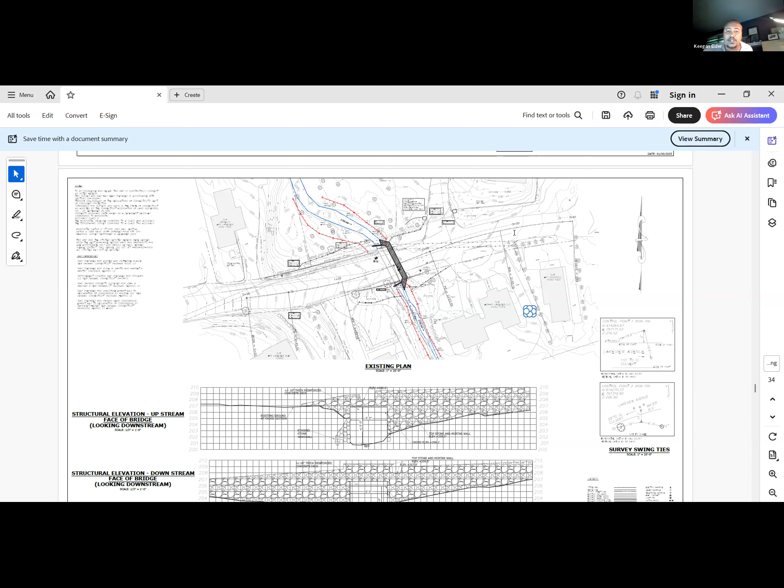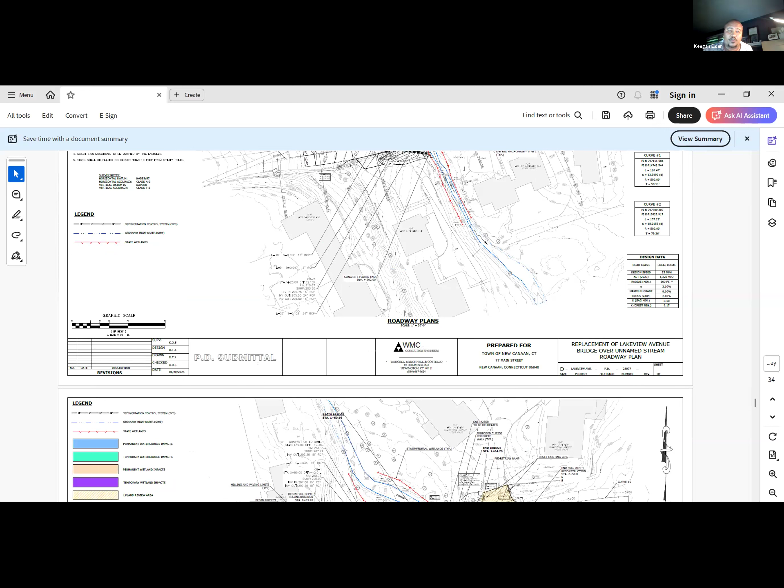In order to do that, I'll scroll down on my plans here and give you guys a view of that work. So this is our existing or proposed plan. The roadway work needed is shown in yellow. We're doing some minor drainage work just west of the culvert.

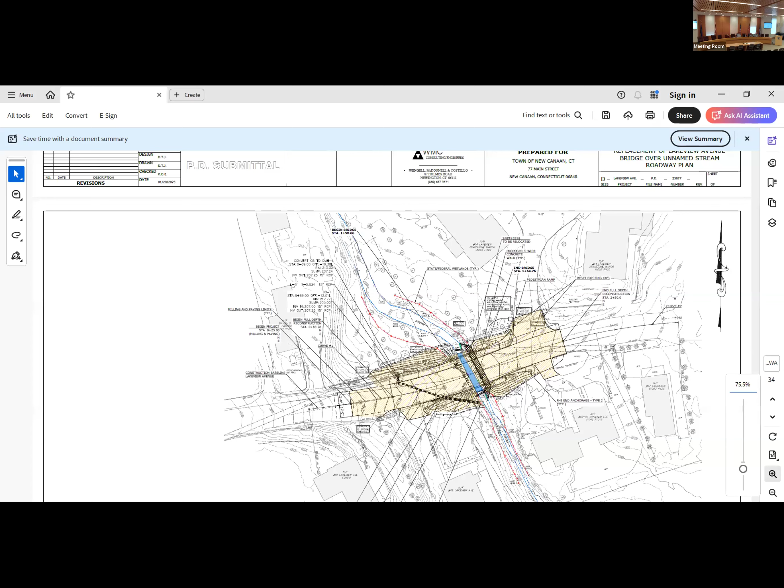Before - sorry Mr. Elder, could you move your screen, zoom in so we can read the notes? Sorry, yep, that's better. Okay, here we go, up a little, and can you move it to the left? That's perfect, thank you. Yep, sorry about that. No worries.

This is Lakeview Avenue, running west to east, and this is the brook running north to south. Our existing culvert is that light blue shaded area. Our proposed culvert is slightly wider than the existing culvert, and like I said, it's going to improve hydraulics and conveyance of water through this area.

In order to construct this culvert in the dry, which is a requirement by fisheries and the E&S guidelines, state of Connecticut, we're going to temporarily bypass the brook with the dark shaded bypass pipe as shown here. The contractor will set up his E&S controls at the beginning of construction, install temporary cofferdams shown in the light blue or aqua color, bypass the brook, during which time he'll remove and install the new culvert, construct any adjacent wing walls needed, backfill, install guide rail, drainage, and repave the road. It's a relatively straightforward project.

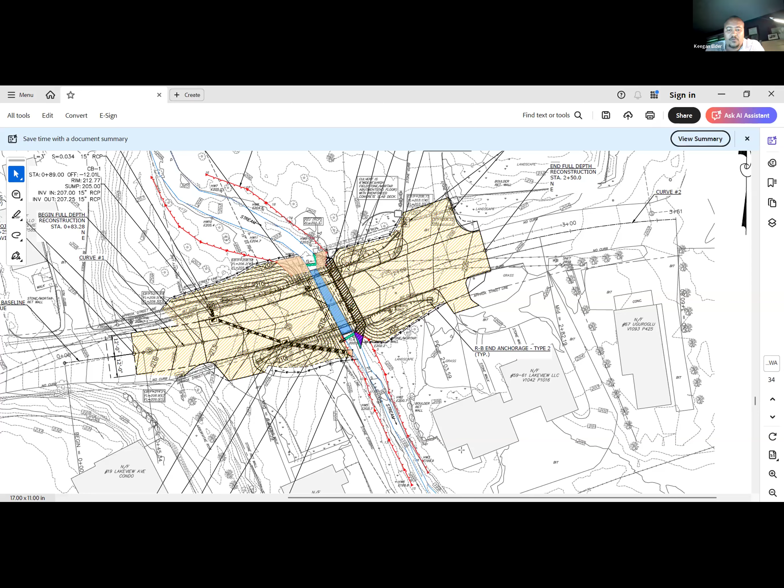The cofferdam that they use or can use would consist of either sandbags, dead men wrapped in plastic, or concrete blocks. We don't anticipate that there'll be driving sheets for this work - it's not that deep of an excavation that driving sheets would be required, but essentially that's the gist of what we're going to do here.

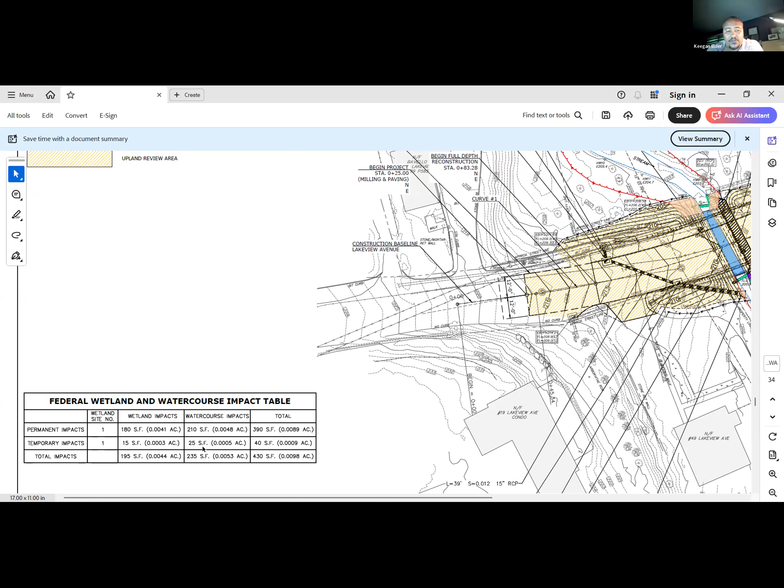For impacts, our wetland impacts associated with this work: permanent 180 square feet, watercourse 210, for a total of 390. Temporary impacts, that's the area of the cofferdams, is 15 for wetland impacts, 25 for watercourse impacts, with a total of 40 square feet. So total wetland impacts 195, watercourse impacts 235, for a total of 430 square feet of impacts.

And all of that work is associated with either removing the existing culvert and installing the new culvert, any grading associated with that, our temporary bypass pipe, and reconstruction of the existing drainage that flows through the project. I'll go through another plan or two just to give you guys a concept of the proposed structure.

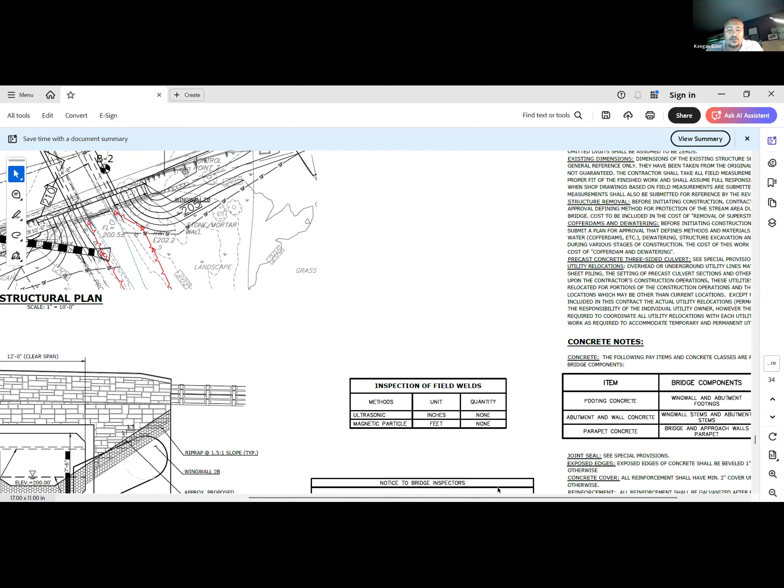So this plan, an enhanced version of what I previously had up on the screen, better depicts the limits of our work—the wing walls I mentioned earlier, and guide rail along the edge of the road to protect oncoming traffic from the drop-offs down the channel.

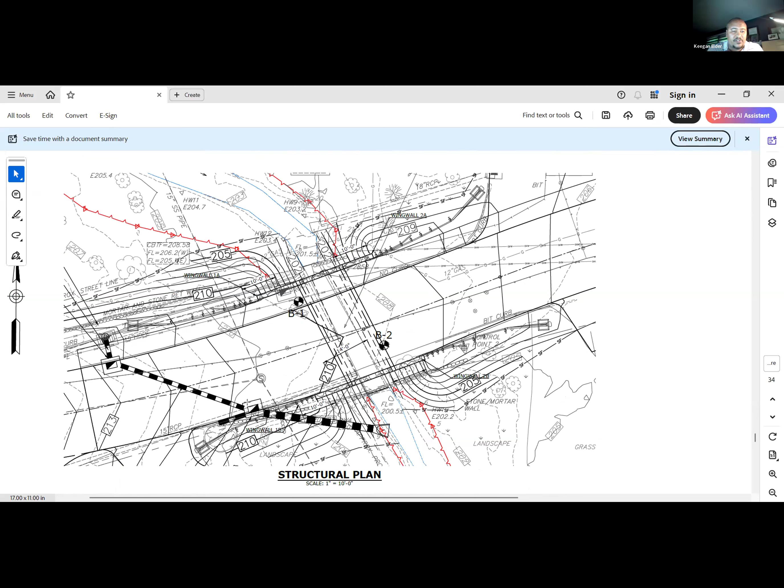We have a sidewalk over the culvert. Here's our culvert overspanning the existing one. The proposed drainage improvements are shown with catch basins, pipe, and outlet pipes. This view captures what it would look like from an elevation perspective—our culvert shown here, this is our box culvert or channel work, with wing walls and parapets shown with the block shading.

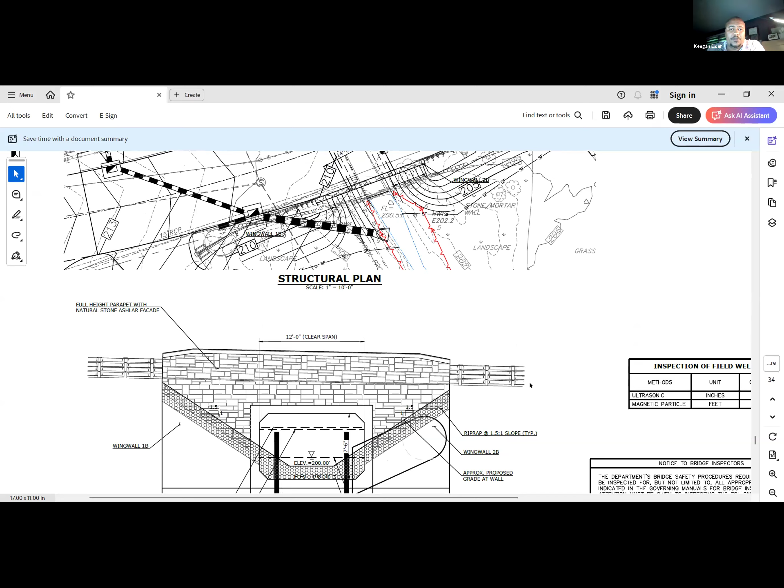As part of this work, we will also be replacing any existing stream bed material found on site within the new culvert. That's one of the recommendations made by fisheries—that we reuse any natural stream bed material. If we need supplemental material, they gave us guidance on specifications for sourcing it to mimic what's existing in the area.

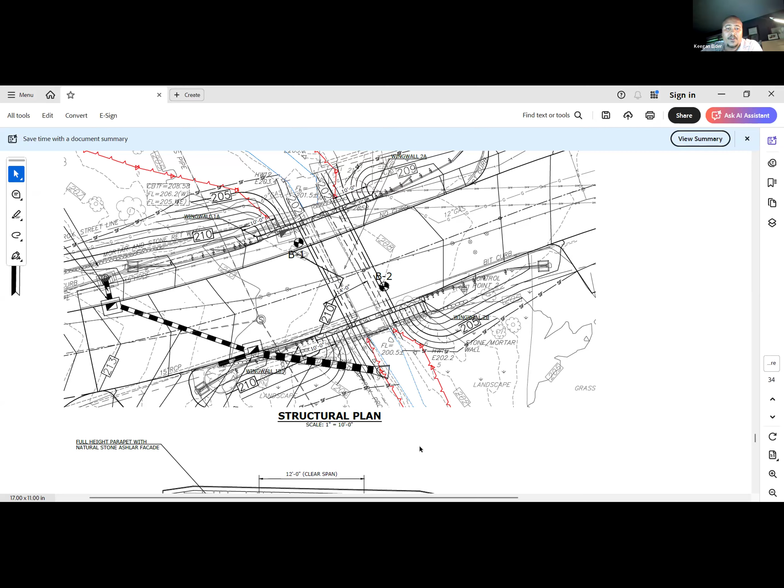This project, from a schedule perspective, is hopefully going to move forward at some point this year. Our next step, once we get through this local inland wetland requirement, is to consult with the U.S. Army Corps of Engineers. There's a potential funding grant from the state of Connecticut called the Local Bridge Program, where one requirement is that we present this project to DEEP and the Army Corps for their review and concurrence. A determination on that grant should be coming sometime in July.

Once we get that determination, if successful, we can go ahead and submit to the Army Corps for their review and approval, in addition to DEEP for the 401 water quality certification. That process generally takes maybe 2 to 3 months. So with that in mind, I think the project will be able to go forward as soon as this fall—but again, that'll be up to the town and their construction schedule.

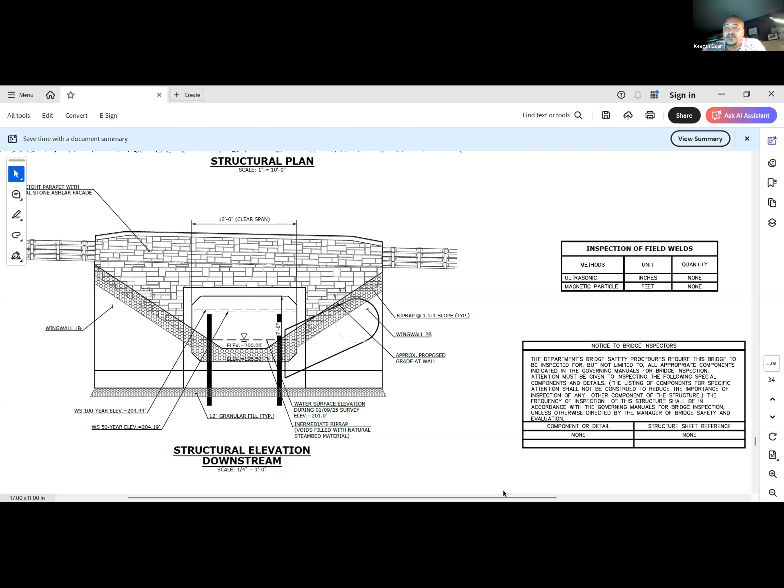With that, I will open it to any questions. Thank you very much, Mr. Elder. Do we have questions?

Director Holland: Keegan, thank you for the explanation on the setup and staging for construction activities. Can you review a bit more about post-construction of the culvert and wing walls, and how the embankments will be stabilized upon completion of the activities?

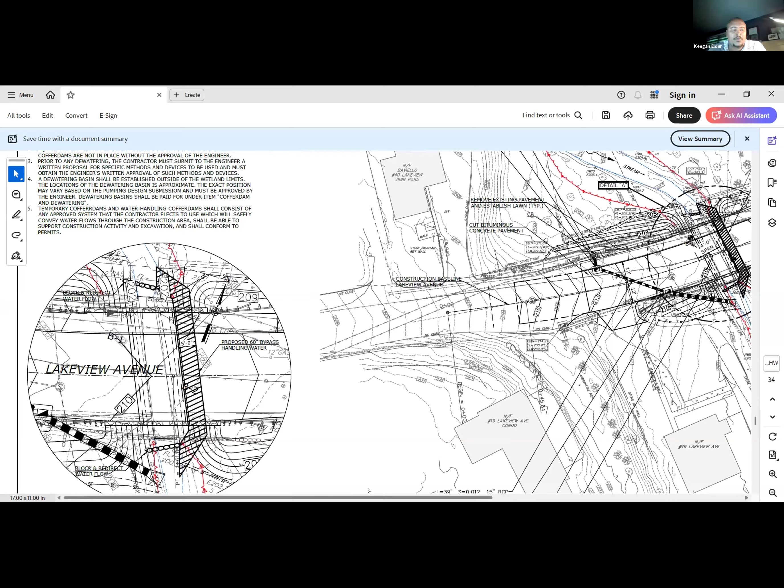Sure, absolutely. So our existing embankments, I'll highlight on this view, will be stabilized with a natural 2-to-1 slope. This slope will be seeded post-construction. The limits of our clearing—there aren't too many trees out there. There may be a couple removed for construction, a couple that are dead or close to dying. As for the slopes and embankments, we anticipate gentle slopes off the edge of the road at 12-to-1 for about 4 feet, matching what's existing, then 2-to-1 down to the channel and to the toe of the slope.

In some cases, for example on the southeast corner, we have closer to a 3-to-1 or 4-to-1 slope, and on the other three corners, closer to a 2-to-1 slope that is stabilized with grass and natural plantings.

There are no proposed locations of riprap. The flows through here, although relatively steep, scour numbers did not indicate significant scour, nor is there evidence of significant scour in the existing conditions. If it was determined that we needed stone or riprap to stabilize these slopes, fisheries acknowledged that we would need to surface dress the riprap with natural stream bottom material. But as of now, we're not proposing any additional stabilization beyond natural grading down from the wing walls and turf establishment.

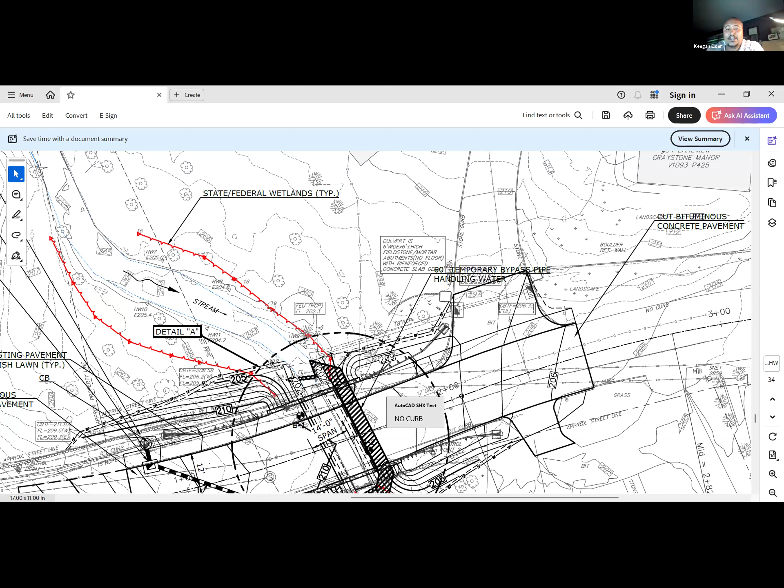Yes, it's going to be closed. Where is the detour going to be then? There will be a detour in place. We have a plan proposed to the city.

I don't have that plan with me currently, but I can certainly share that with the commission. The project is anticipated to be closed just before and after the bridge. Our specifications require that the contractor maintain access to any driveways, mailboxes, trash pickup, and emergency services. All of these things are standard that they are required to do during construction.

How long is the bridge going to be closed? We anticipate this to be a one-season project, which is generally in the 8-month range. I don't see much complications that would make this longer. Matter of fact, if you get a good contractor, they can get this done as soon as 6 months. But from a planning perspective, we anticipate it to be an 8-month project.

That includes procurement of materials, submittals that are needed, removal of the existing, installation of the new, any in-water work, stabilization of the slopes, guide rail, new sidewalk, new pavement, driveway aprons, drainage, and completely repaving the road. So probably about 8 to 9 months from a planning perspective.

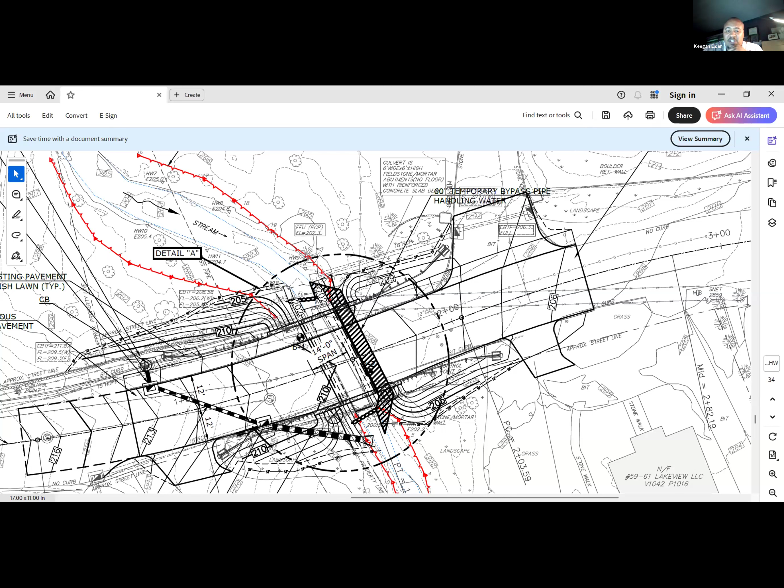And as a general rule of practice, a year beyond that, the contractor is still required to make sure these slopes have reestablished growth and are stabilized before that retainage is paid to the contractor. So there are a few mechanisms built in to make certain that they get back on site and make sure everything has been stabilized and established. During construction, if he has to go away or shut the site down for any duration, he will be required to protect those slopes as well, in his own best interest. But that's generally what's in place for establishing and protecting the slopes.

Great, thank you very much. Just for the commission members' knowledge, Joe Zagorensky is also on the call by Zoom, and he's our town representative and does all the bridge construction work. I'm pretty sure Joe is much more familiar with what Keegan's talking about, so it does not seem necessary to add another special condition. So the only special condition I would recommend is the as-built drawing upon completion. I believe Commissioner Owsley has an additional question.

Nope. Oh, okay, very good. Sorry, we thought you did. So does it sound as though we need that potential second condition? I would say no. Joe can chime in if he wants to unmute himself and add any color to the discussion we're having. Yeah, we're not going to walk away from the project until it's stabilized, so I don't think there's any reason for any sort of special condition. It is the town.

Okay, so just one more. Yeah, please, go ahead. Mr. Stepanek. Joe, who has to approve this besides wetlands? Is there another commission?

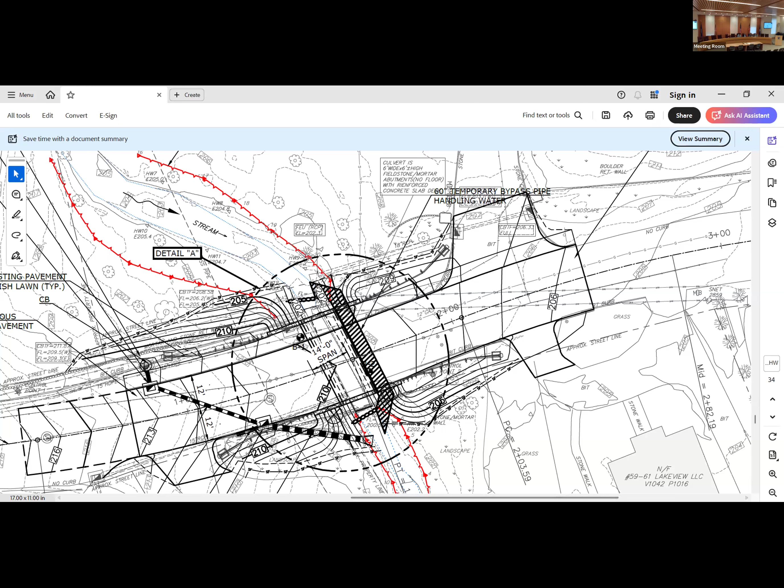Application IW-25-19, 22 Parish Lane, Daniel and Gillian Gabrielson. Remove invasive plant material and install native plants within the rear woodlands. Install low impact pressure treated wood boardwalks over wetlands totaling approximately 100 linear feet by 4 feet wide. Using stone dust or native gravel, install on grade walking paths in upland areas totaling approximately 300 linear feet by approximately 4 feet wide. I'd like to invite the agent to make a presentation to the commission, I believe it's Mr. Troy.

Yes, good evening all. Can everybody hear me? We can, thank you. Let me share my screen. Okay, so I'm here to represent the Gabrielsons for their property, for the wetland renovation in the back of their property.

The Gabrielsons basically have 3 goals in mind for this project. The first goal would be to eliminate the invasives that are taking over the area. There's Japanese barberry, goutweed, porcelain berry, and burning bush in the area that is basically choking out all the native species. The property sits elevated on a retaining wall, so their entire view from their back patio and house is of this wetlands. With the invasives choking it out, it becomes an eyesore to the owners, and it's also becoming environmentally impacted by the invasives taking over.

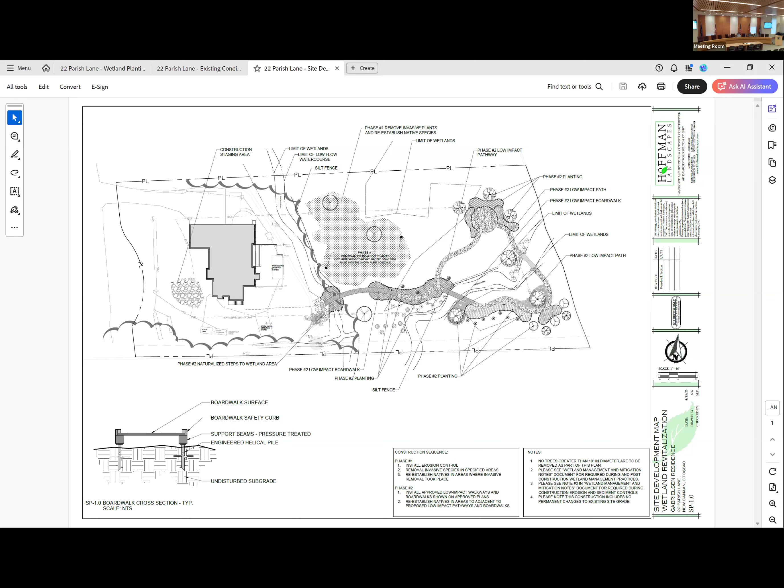The areas right along here are the elevated boardwalks. They would be mounted on helical piles into the ground with a wooden post on top. Excuse me, I'm sorry to interrupt, do you think you could zoom in a little so that we can see the detail more clearly? Thank you so much. Is that good for commission members? That's better, yep, thank you so much.

So I'll start back here. This is an existing staircase that comes down with a walkway that goes across what I would call a seasonal brook. The only time I've ever seen water in it is now with all this rain. We would then access the first section of elevated boardwalk that crosses the direct wetland area, dropping onto the gravel path, and then picking up the elevated boardwalk again to cross this water course, which has always been flowing anytime I've been there, so it's a fairly active water course.

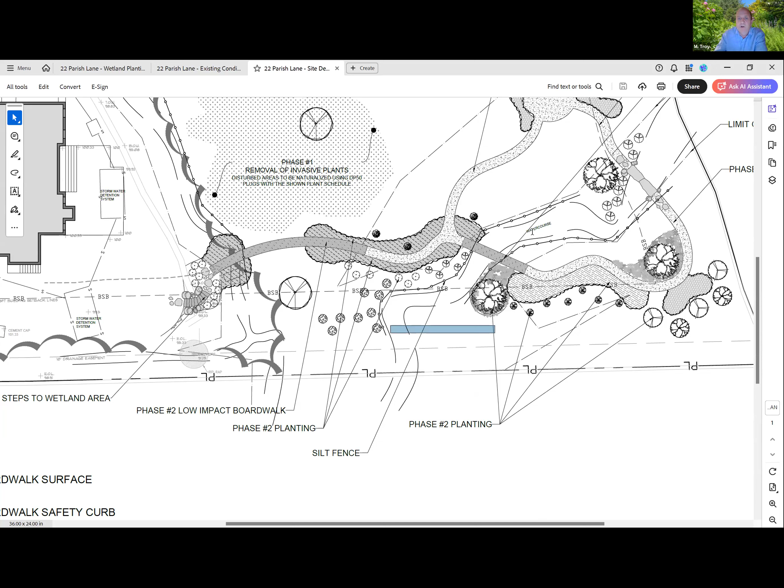The one thing I'd say, when I was out there the other day, I would like to push the crossing a little farther up because the banks of the stream get much steeper and higher here, so I don't think we'd have issues with debris coming down the water course and contacting the bridge. Could you point with your cursor where you'd like to put that? It's in this narrowed area, it becomes very steep. This entire water course is fairly well lined with natural stone. The only place it isn't is up in this area where it does overflow the banks and floods into this area, but otherwise it's pretty well secured on the banks.

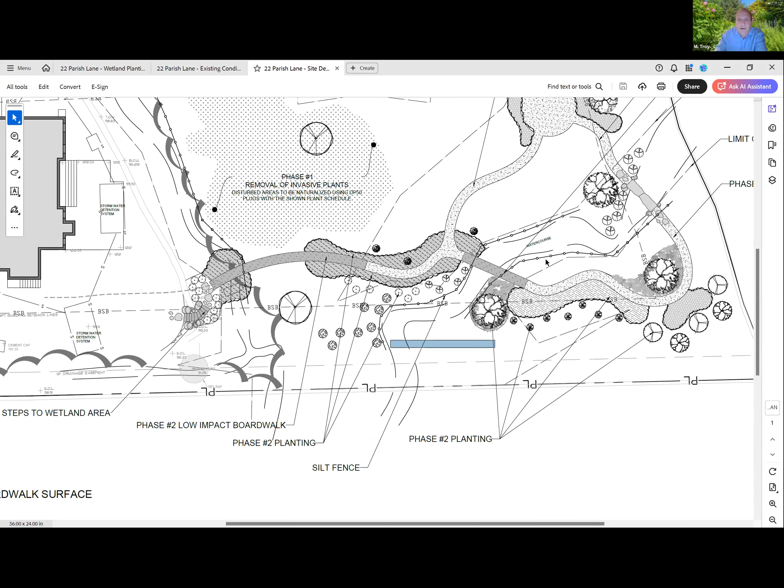So after crossing this bridge, they just want to be able to access their land over here. We would come around, with a lot of native plantings in this area, coming to this area where there's already a double stone on an old farmer's wall where you would cross the waterway again. This would not be constructed here, it already exists.

Coming up in this area, back into the gravel. The draftsman drew this as a circle, but I don't envision it as a circle. I envision it just as a level area that may even just go back to leaf litter. I don't see a reason this necessarily needs to be gravel, but it's the flattest area on the property, and it's an area they want to surround with lush, nice plantings.

We'll introduce things like pawpaws up here, and maybe have a pair of Adirondack chairs or something to read a book up in here. And then it basically returns you back in and you exit the wetlands again.

In this area over here is really the only tree that they're interested in taking down. It's a large dead tree, I believe it was an old swamp maple, or Acer rubrum, and it's leaning towards the residence. It's a fairly good sized tree, and it's been dead for quite a while.

This is a heavily infested area of Japanese barberry, and that's where we would put a lot of the plug introductions in that area.

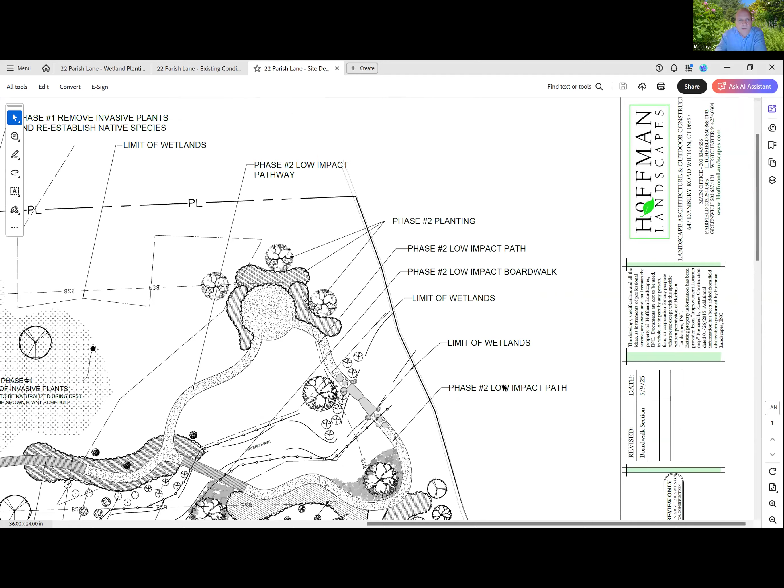If I can switch, I'll bring up the planting plan. So this is basically showing you what we want to introduce into the area as far as plantings.

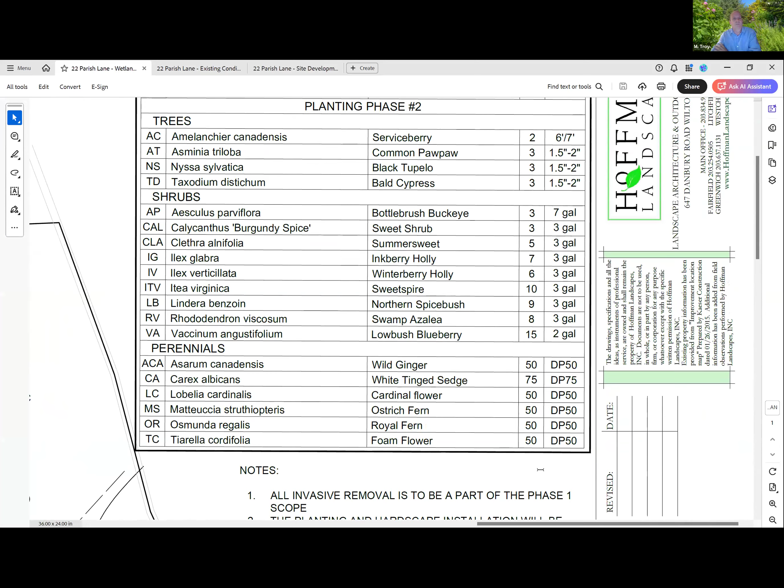For the grasses, we want to use carex. We're going to put some marsh marigold, cardinal flower, golden Alexander. That's all going to be introduced primarily as plugs, DP50 plugs and DP75 plugs.

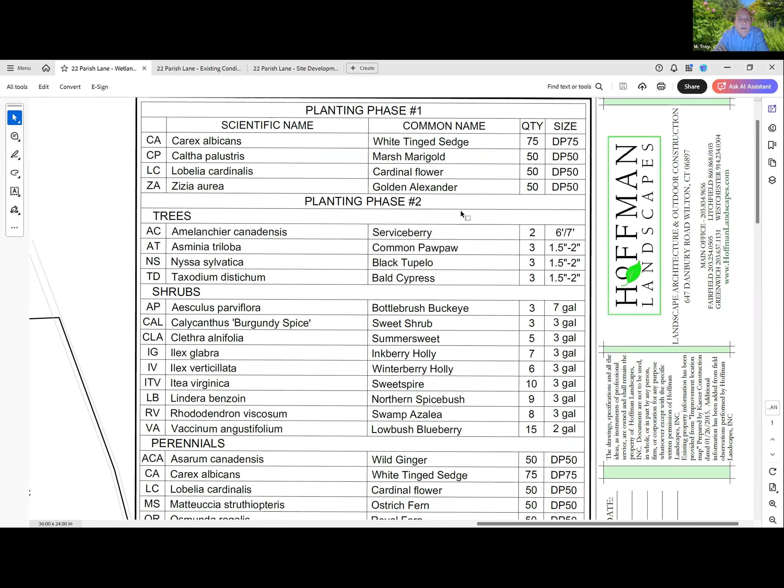And then coming down below that is sort of the larger shrubs or small trees, Amelanchier canadensis, and the common pawpaw. Nyssa sylvatica would be introduced in the area where we would be taking that one large tree down. So essentially over in this area here, we put the Nyssa sylvatica in.

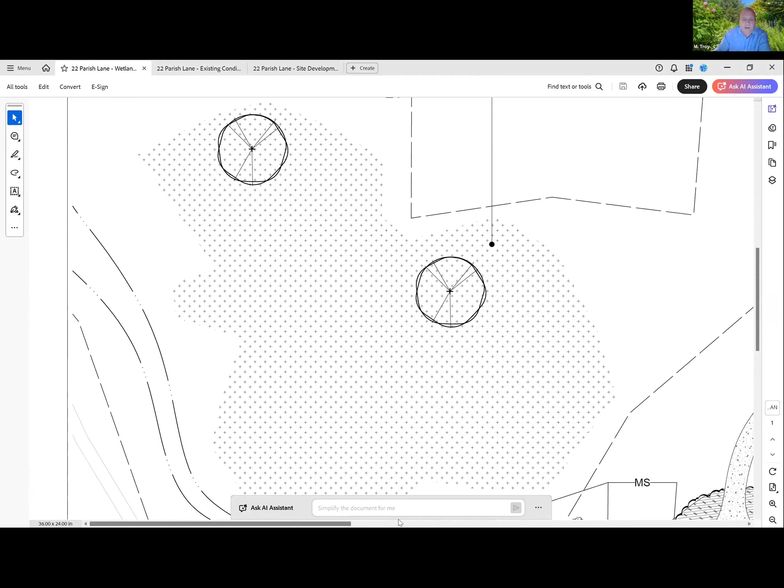Taxodium distichum in the lower corner. Let's zoom this out a little bit so I don't have to zoom so much. So we would be putting the Taxodium distichums over in this area here after.

And also this whole entire area, you can't even walk through there with all the burning bush. So by opening that up, we're going to create better conditions to grow the native plant material.

As far as shrubs, we're going to put Aesculus parviflora, or Calycanthus 'Burgundy Spice', Clethra alnifolia, Ilex glabra, Ilex verticillata, Itea, Lindera, Rhododendron viscosum, and Vaccinium angustifolium.

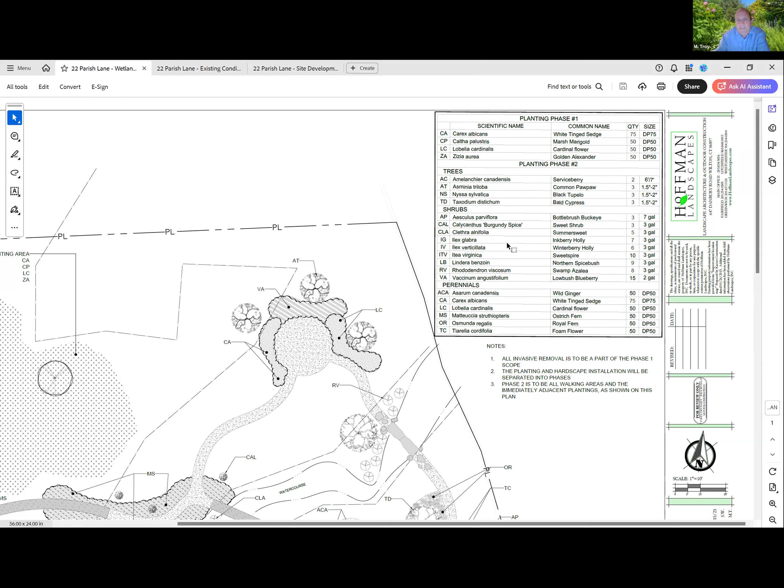And the perennials, as you can see, we're doing Asarum canadensis, Carex albicans, Lobelia cardinalis, Matteuccia struthiopteris, let's just call it ostrich fern, royal fern, and foam flower. And that's primarily what we're proposing to do.

Any questions? Any questions from the commission?

This is Angela Jameson. I just have a couple of questions. I mean, it is a lovely wetlands. You stand there just below the house and you look onto those wetlands. To me, they look absolutely lovely as they are, except of course for the invasives.

But from what you've said, the homeowners really want to have some paths through those wetlands so that they can enjoy their property. Could you just show with your cursor where there are existing paths in the wetlands right now?

So essentially this entire area over in here, well, I guess starting here, it's pretty much open. There's not a lot of growth there. There are some natives, and some Japanese primrose that has come downstream and is growing in this area. So there's not a lot of growth here.

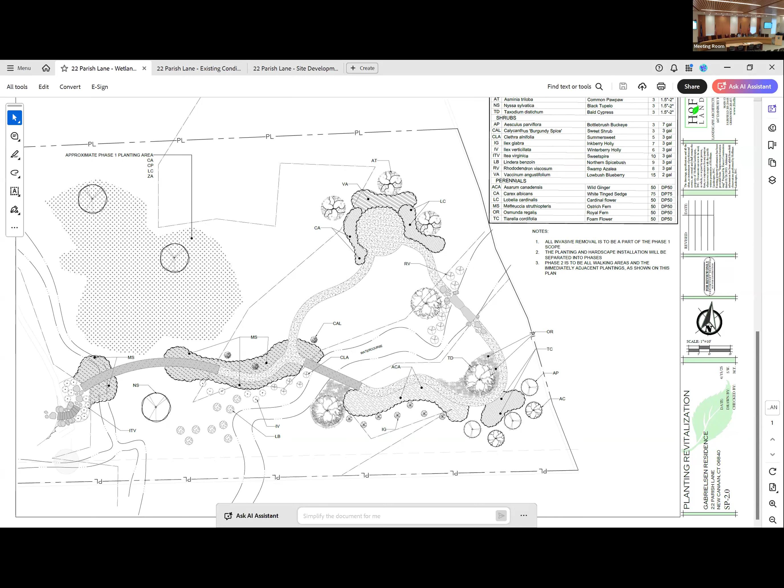I had a question regarding your maps. I'm looking at the site development map dated April 25th, and there are quite a few lines on there, so I did some coloring to identify where the wetlands are. I believe the wetlands on this map are shown with one dot and a long dash. By the house there's a comment that says limit of wetlands, but I think that pointer may not be in the correct place. I believe the line with 3 dots is the actual low flow of the watercourse, and the limit of the wetland should extend out to the line with a single dot. But maybe I'm confusing something here.

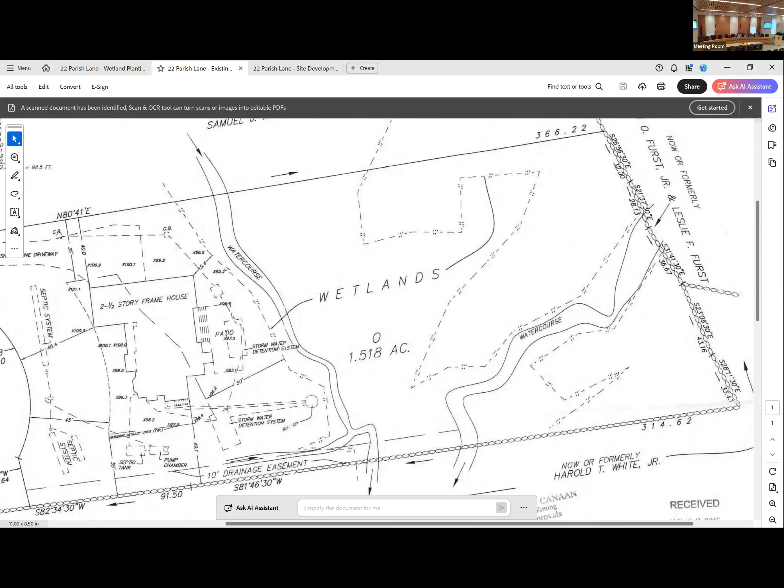The plan we worked off, I'm not seeing that on it. If I go back to our plan, his site plan. Right, I'm looking at your site plan. I'm basically questioning whether you have accurately shown us the limit of the wetlands.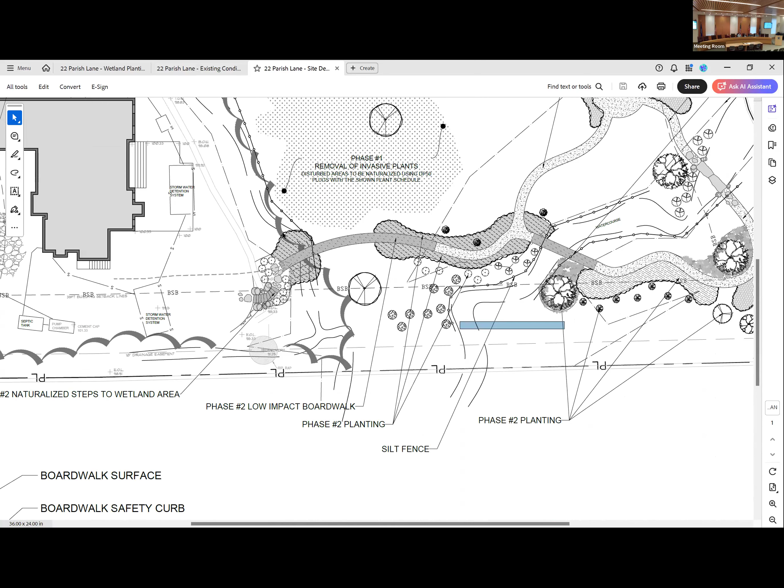Trying to see where they have these arrows. You had it a minute ago, if you just go down a little bit. No, the other way, that's it. So move it down a bit, north side of the house. Go up. There you go, okay, see, between the two property lines. Yeah, they do have that in the wrong area. I'm sorry, yeah, right, that should be over here. There you go, right, yeah, there. I think that pointer is not correctly extended. That was my point. Yes, I agree with you.

Maybe you could just resubmit one copy which has that pointer extended. I'll take care of that in the morning. In addition to making that correction on the map, good catch, Madam Chair.

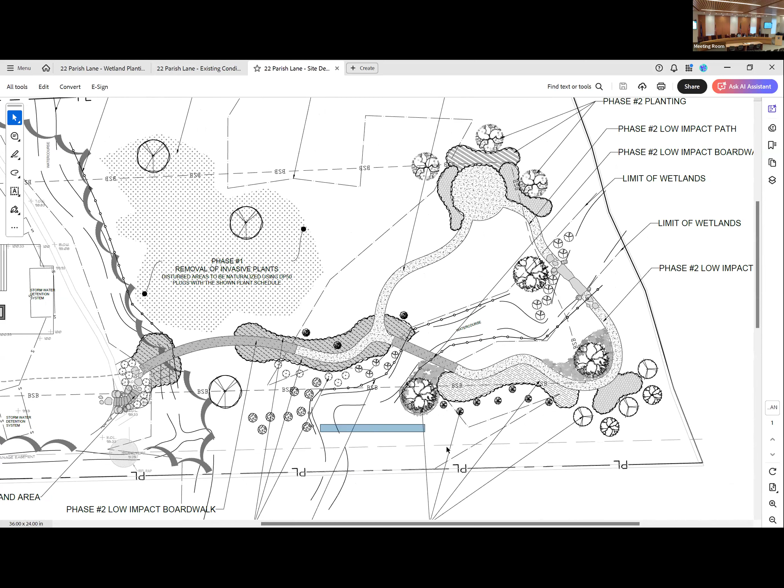You mentioned that you would like to potentially shift the location of one section of boardwalk. Yes. If that could be reflected on the submittal as well, once you determine where that will be shifted to, I think that would be helpful. I will do that. And I had another question.

Are all the felled trees going to be replaced numerically? So the only tree we're really proposing taking down is the one large dead Acer rubrum. We're adding 2 taxodiums and 3 Nyssa sylvaticas, I believe, so we're adding 5 trees back into the planting. Well, that's good, that's great.

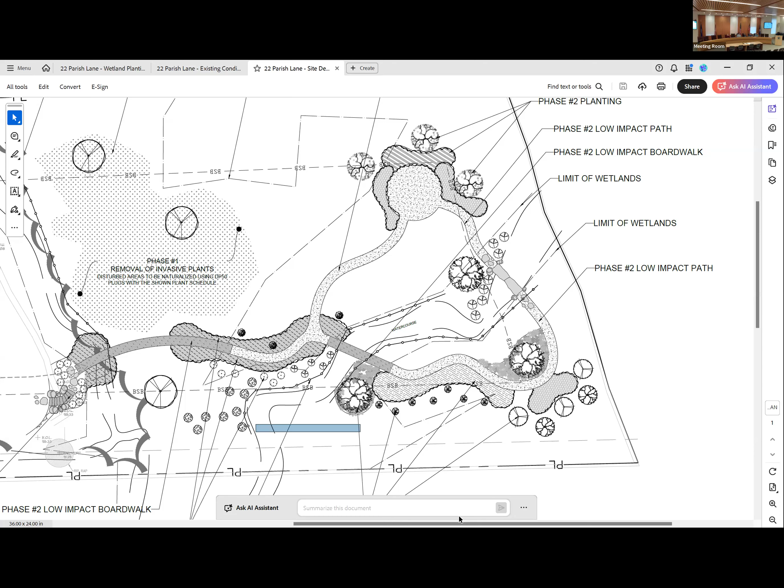Okay, Director Holland, any special conditions that you can think of? A few more questions. Sorry, I'm full of questions tonight. You had, on your plan, I see you phasing different aspects of the plan. It looks to me like phase 1 is the primary motivation for the project, to remove the invasives. Correct. And then would replanting take place as part of that phase 1 project, or any kind of mitigation to that area?

So first off, the phasings were for a couple reasons. One, we originally hoped to get the invasives out prior to them leafing out and growing. Obviously that hasn't happened. Phase 2 was so we're not working in wet conditions; our intention was to do it in the fall season so we're not working in the mud. I would probably imagine this may end up becoming a 1-phase program. I can't speak for the Gabrielsons, but since we're looking later in the season, this may end up being a summer project where we tackle both phases. Did that answer your question?

Yes, I guess my concern would be if phase 1 occurred and then ultimately phase 2 never occurred for some reason. I would like to be assured, and I think the commission would like to be assured, that it is a full project, especially any mitigation planting that would be taking place. Yeah, so all the mitigation planting we can do in phase 1, we will do in phase 1. Obviously our access to the lower right-hand corner of the area is limited without that boardwalk, so I'm not sure if we would have ways to carry trees across that watercourse. That would be reliant on phase 2 going in. But because we're going to be removing all the burning bush, we would do the herbaceous and smaller shrubs in that area as part of phase 1. Their goal is, like I said, to get rid of the invasives which are taking over, and have this attractive as they sit on their terrace to look down on it.

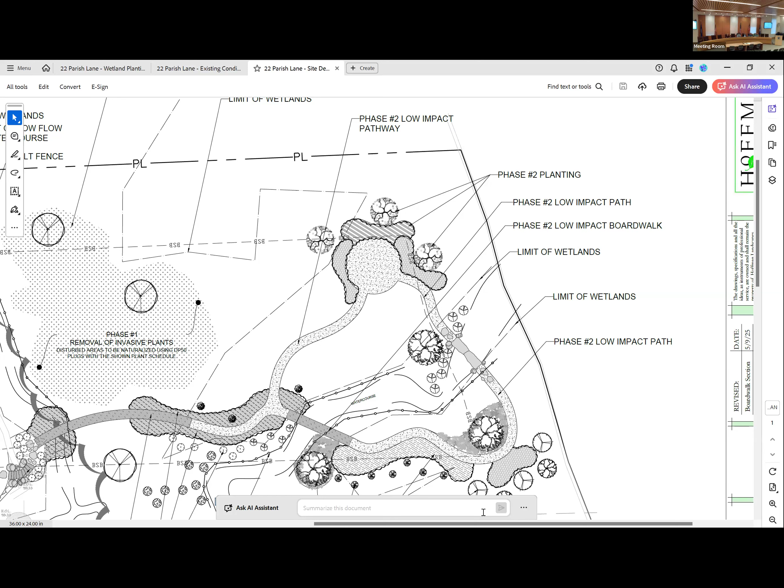Somebody like to second that? I second. Mr. Ramirez, thank you. All those in favor, please say aye and raise your hand. Aye. Commissioner Owsley, thank you so much. So that is approved unanimously. Thank you very much indeed. Mr. Troy, appreciate your time. Thank you. Have a good night.

So moving on, item 10, application IW-25-37, IW-25-24, 37 Long Lots Road, Min Kong Tang and Yuan Lin.

I am not going to read the description of what they're planning to do, because I believe that there has been a change here, and I'm going to ask the agent, Barbara Wilson, to explain that change and to make her presentation to us.

Yes, good evening. I'm Barbara Wilson. I'm a licensed landscape architect from New Canaan. I was hired by the clients because they wanted to do a couple things. They wanted to create a flat back lawn, and then they wanted to do some removal of dead trees in their backyard. What has come to pass, the owner has opted now to not do the grading of the back lawn area, and therefore we don't have to do any grading, filling, or renovations in the mostly upland review area at the rear of the house.

So what happened is the owners wanted to originally remove some dead trees. There was a lot of very large standing dead trees, and they were very hazardous in their backyard, and they were worried that in the woods upland review area and the wetlands, their children going back there might get hurt. So they hired an arborist who was supposed to come out and remove some dead trees. And the arborist proceeded to basically clear cut, which is shown on these photographs. Can you see my photographs? Yes, we can.

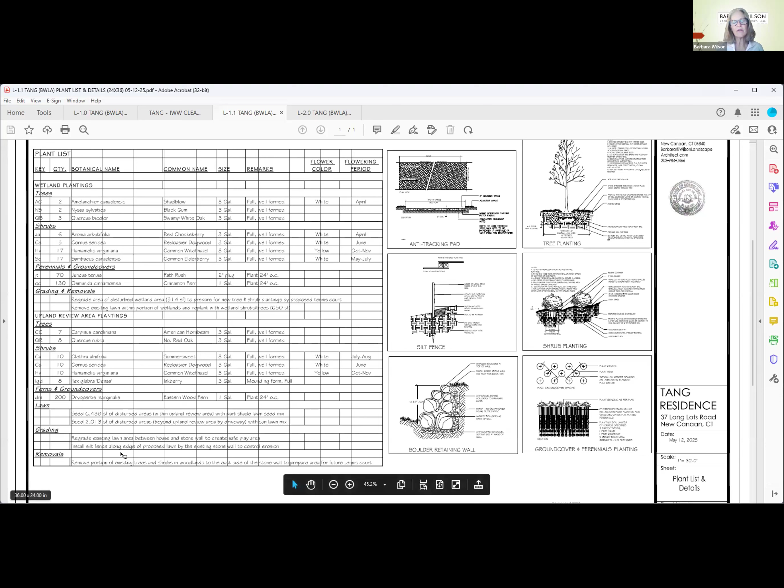So that is it for my presentation. Some of these details, we're not doing the stone wall, we're not going to do the silt fence because there's no need, and we're not going to do the anti-tracking pad, but we are going to do all of these plants here. And then that was the sort of removals and demolition, which isn't going to necessarily happen. This whole area is not going to be disturbed at all, and the stone wall is all going to remain as is.

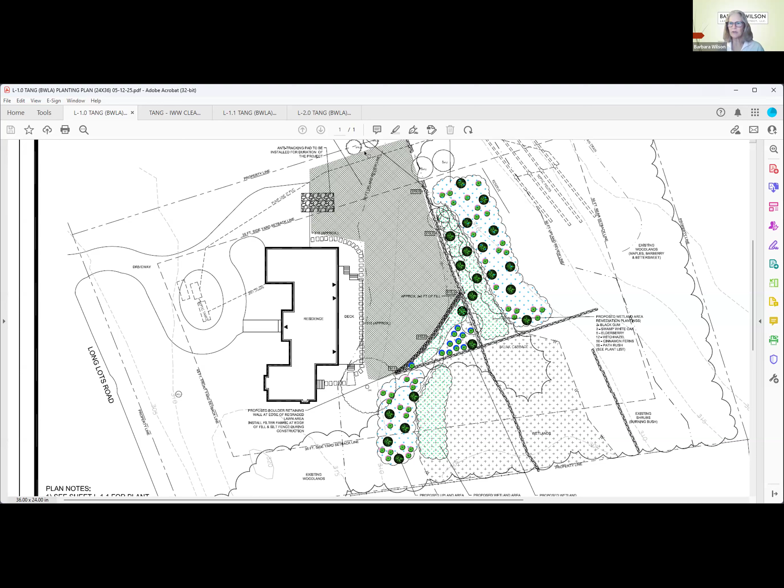Kathleen, I think we need a new plan, don't we? With all the changes and everything? No — the only change was the grading. We're not doing the grading and the lawn work. All the rest of this, I would think you'd want to smooth out some way — you just can't say we're not going to do this, we're going to do this. I think you need a new plan on this. I don't think it's a big deal, but you need something that we're going to work from, that they're going to work from.

So you could handle it a couple of ways. In this case, the wetlands permit will not include, or will specifically exclude, any of the things that were part of the application that they are actually not doing. Should the applicant wish to come back at a future date, they'd have to come back before the commission to do the grading and the stone wall work.

So as far as I understand what Barbara has explained, as far as what I'm going to be doing going out and looking at the final product — it's the mitigation planting only, which is frankly a result of a violation. So this has sort of gone back into the lane of mitigation planting only.

One special condition that I would suggest is that upon completion of landscaping activities, including the mitigation plantings, the landscape architect shall inspect and provide a final report confirming compliance with the wetland permit. So I think that will capture it—she's not asking to change any of the plans or any of the mitigation plans that are going to be done.

I completely understand they are not grading out the backyard. They are not asking to do the removal of the stone wall or reconfiguration of the stone wall. It almost is two separate projects, honestly. It came in initially as the grading and the stone wall work. Then the disturbance to the wetlands was discovered by Barbara when she went out to meet with the client, and then it turned into a mitigation plan.

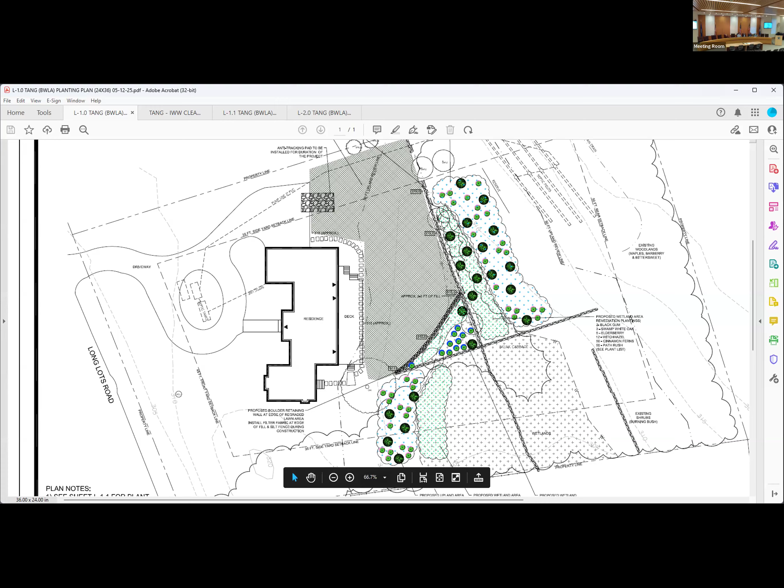Angela Jameson: again, one thing that does concern me, whether or not we ask for a new plan, is whether the homeowner now fully understands that work may not proceed without a permit. He had already met with you, Miss Wilson, and you had explained what was going to be required permit-wise. Nonetheless, he proceeded to have a contractor whom he didn't know, and knew nothing about this guy's credentials, and allowed that person to come in and do substantial work on his property. So I'm a little concerned that he might go ahead one day and do the grading of the lawn without coming back for a permit.

Well, it's not only that—he may go next door to the applicant and do the same thing and keep doing this. He's got to be told. Well, no, this isn't about the contractor—I'm not concerned about the contractor. I'm concerned that the homeowner may not fully understand the requirement to obtain a permit for work in the wetlands or in the upland review area.

I can only say, in my month or two being on this particular project since it was brought to my attention, I have had good communication with the property owner. We had a meeting at the house, in the living room at the dining room table, with the homeowner and Barbara, going over a lot of this. He has been very compliant now that he has been made aware that these are activities that cannot take place unless you get prior approvals.

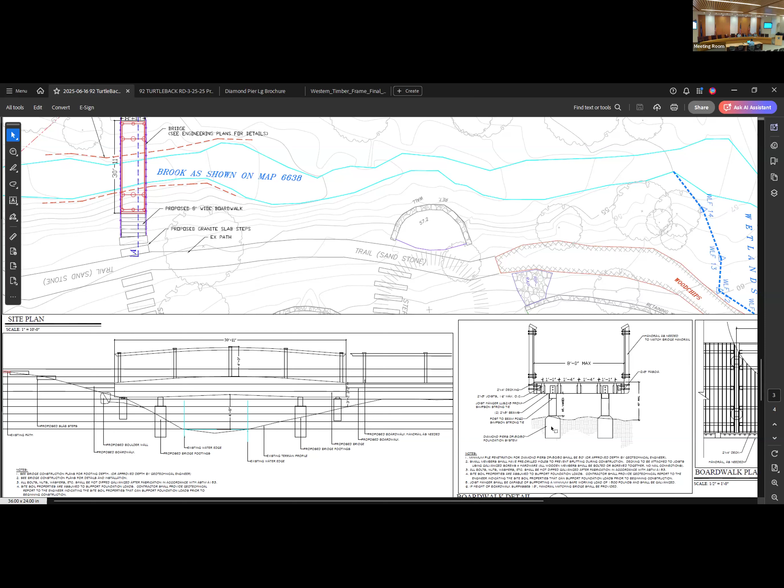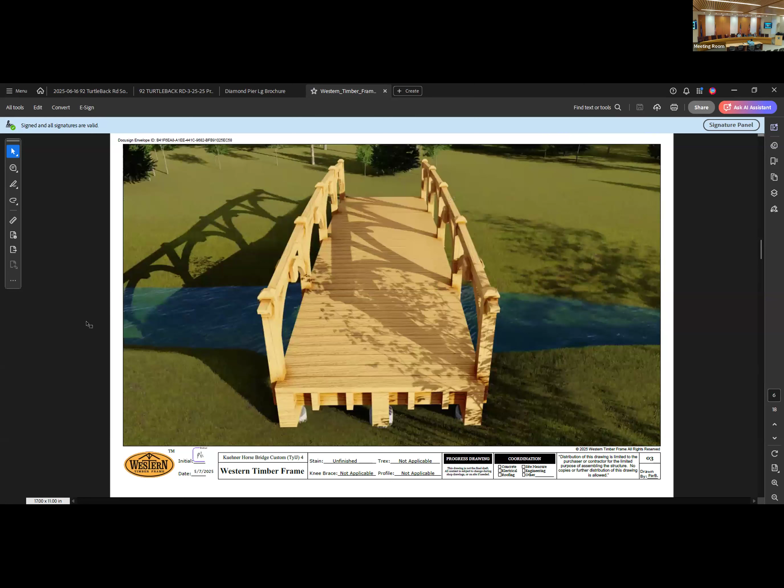So you can get a better sense of the bridge, we're coming over with a wood bridge system that spans the stream. These are the anchoring points with concrete pier post supports. This is the boardwalk — in conversations with Kathy, we're looking to minimize disturbance within the wetlands, doing anything by hand. We're using a diamond pier system, which minimizes machinery or anything within the wetland area for both of these applications, for the anchoring systems. This is the proposed bridge, rendered by a timber company — it comes in and gets assembled on site.

Are there any questions? I believe that covers the general scope of the project.

Questions from the commission? Commissioner Redden? Yes, Commissioner Redden, for the record.

So the trees that were planted, that were part of the plan, that were planted before the permit — who planted those? That's the homeowner's landscape contractor who maintains and manages the property. And the homeowner is a builder, property developer?

Correct. So I would assume they would know they needed a permit ahead of time. Yeah, and that's why we had reached out. The application was already submitted at the time, and the tree work had been approved by Kathy for the removals. So it was truly just a miscommunication about when the work could start and not start.

It wasn't that everyone knew what was happening, that there was a process taking place. I think they probably assumed that once we submitted, it was approved — a miscommunication in that sense — but they're all aware now.

Well, I'm sorry to interrupt, but I am rather surprised that a contractor, someone himself in the property development business, wouldn't have realized that you actually have to have a permit in hand before you start this work. What is the name of the contractor?

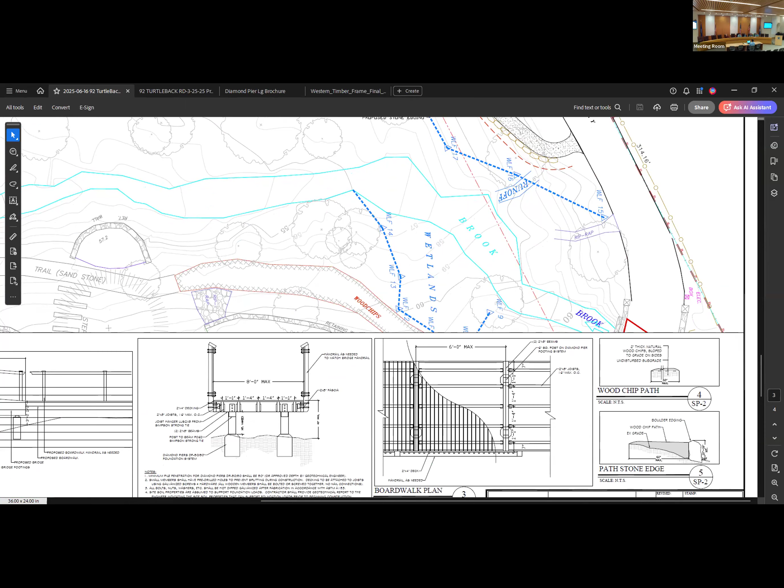The wall was pointed out on the site visit — it was just going to be a gravel pathway, but I guess that's in the permit. Can you go back to the detail for the boulders on the downhill side, where it comes off the driveway? That's where Mr. Redden is talking about — it's a steep slope off that existing driveway. So they're proposing large boulders, shown as circles, to hold that slope, since they have to put the path in. We had talked about that during our pre-application meeting — that boulder work would be needed there because of the steep slopes, and it's all going to be done by hand.

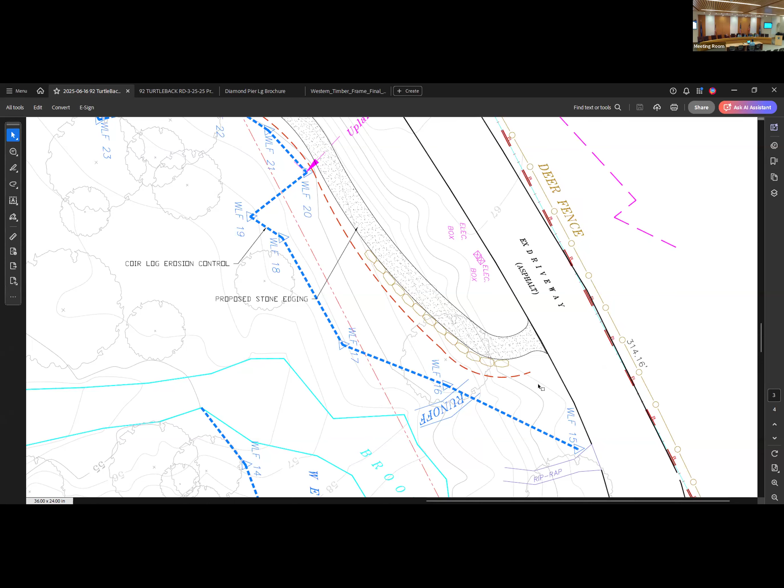Other questions? I just have a couple of additional ones. The wood chips you're using for the path — where are they coming from? They don't have any trees there; the trees that were removed were all pulled out, so they'll be bringing in wood chips. Okay, very good.

I took a look at the picture of the bridge — it seems very large.

It's 30 feet, so we can crest over the whole embankment because it is steep. It's a steep slope in that area.

Do you mean wide or bulky? I mean both. It just seems like a big thing. It is, if you've been to the style of the house, we're kind of playing off with the architecture and the styles around. So it is a timber structure to match, similar to the main house, and there's a horse barn and greenhouse that has a lot of exposed wood and timber. So it's playing off those styles.

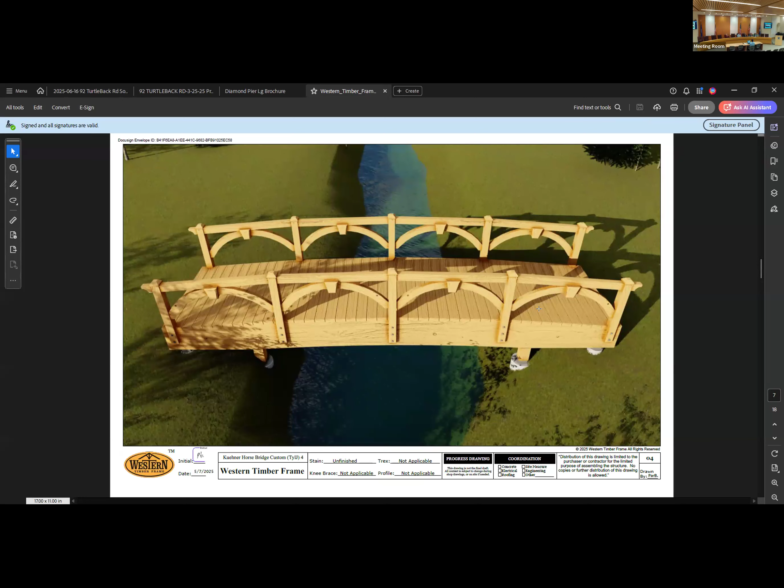Well, exposed wood is very attractive, but I'm just wondering whether a smaller bridge would have done what it needs to do, and whether it would be less invasive and less impactful on the wetlands. Understand the concern on that. What happens is, you can see the span here of the main water body in the system, we needed to span a certain distance and trying to pull those footings as far as possible away from the stream edge and right on the embankment. To make those spans, we needed larger, these wood 8 by 20-inch wood timbers, so that they don't break or flex or have any issues without bringing metal or steel work into the wood. So doing wood, we need to have a larger profile than using metal. And that's to create that span so we're not in the stream with the supports.

If we were to shrink it or downsize those members, then we would be looking at some type of center support, which then gets in the streamway. So we were trying to get outside of any of that. I think it's six of one, half a dozen the other. We could definitely downscale some of that, but I think that's then creating more of an impact to the wetlands versus this structure that's, let's call it, floating over everything, and we can avoid that a little bit.

Okay. Any additional questions?

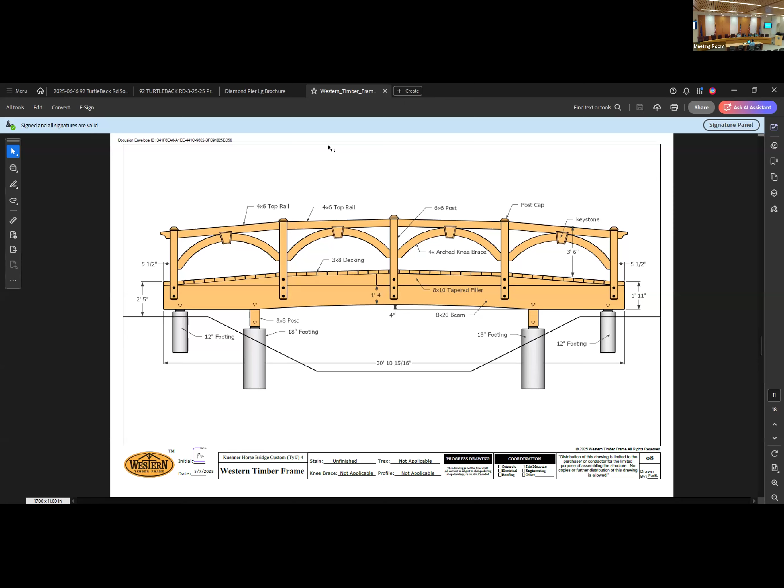Yeah, this is Dan Stepon. Do you get a lot of water down in there? On a regular basis, no. During some of the larger storm events, this is kind of the end of the line for the Oak as well as Turtleback on the uphill side and the back. So during some of those larger storms, they have their driveway bridges over the walkway with, I can't remember it off the top of my head how big that culvert is, but that kind of creates the bottleneck for all of it, if there is one.

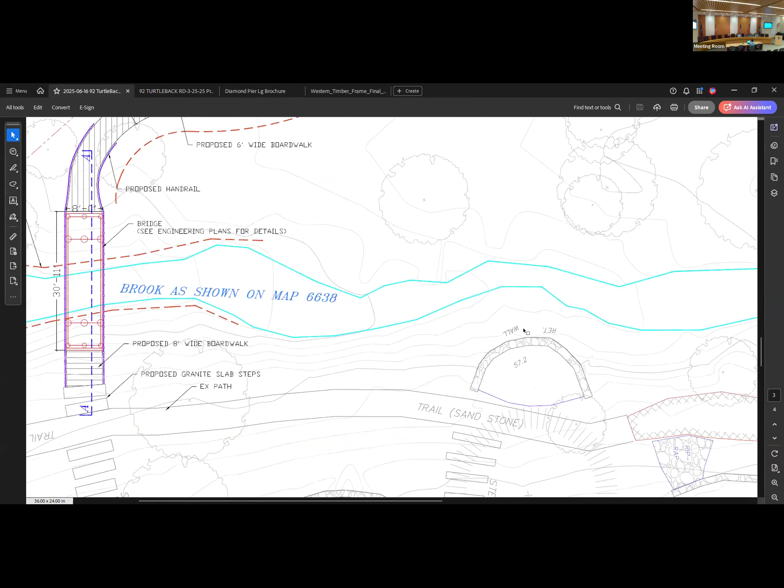And sometimes it will spill over the driveway. And from the neighbor's property over here, there's a riprap apron that's been existing for a number of years that kind of eroded in this space on the 100-year storms we've been getting every few years. And only in those times, the stream does elevate about 2 feet or so. And that was part of, actually, Kathy had brought that up in our initial conversation to make sure that we're clearing the kind of high water mark.

So we took measurements off of the existing stones there. These are 1 foot contours. So that 2 foot contour line, we're kind of just on the edge of where we're proposing any of those piers for the supports. Hope that answers the question.

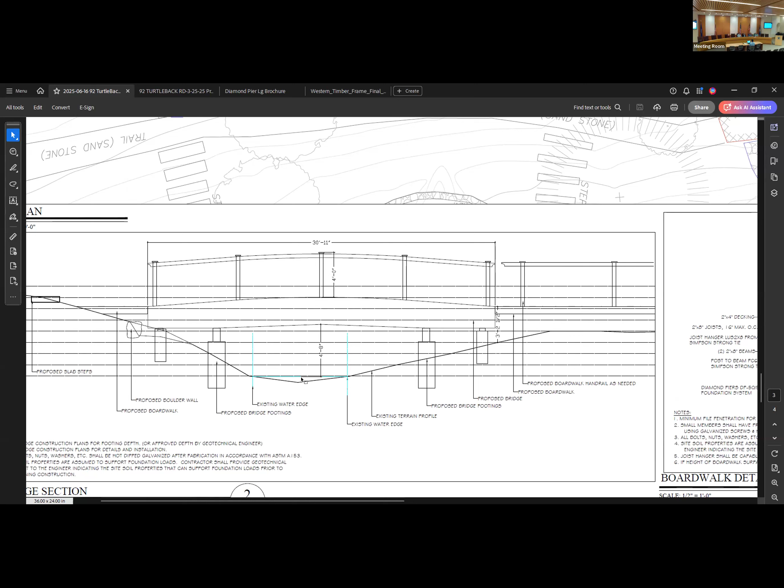As far as any special conditions are concerned, Director Holland? I had two. I haven't thought of any more as we're sitting here, hearing the presentation. The first one would be upon completion of landscaping activities, the landscape architect shall inspect and provide a final report confirming compliance with the wetland permit. And the second one, because we do have permanent structures in this area, that they would provide upon completion of the trail system, submit an as-built.

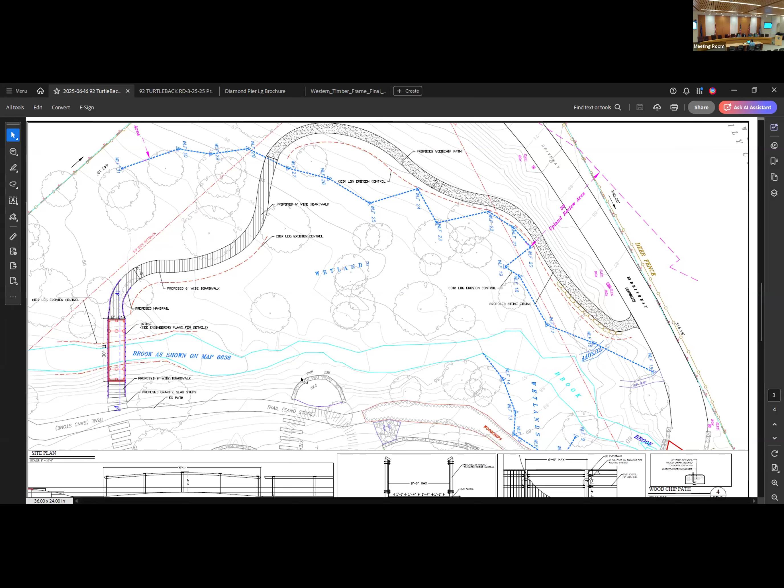Very good. Can you do a site visit, you as the director, after to check? Okay, that's what I do, we'll do multiple site visits during construction, and then the applicant, once they receive our wetlands permit, when they finish the job, they turn in something called a statement of compliance. I then go out and do a final inspection, but prior to that, I'll get his report saying plants look good, it's been done in compliance. I then go out and check it again.

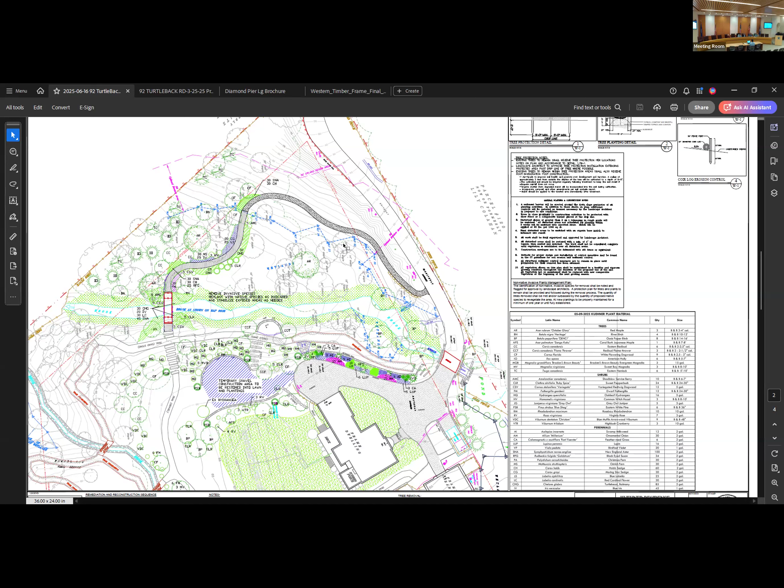Very good. Would anybody like to make a motion?

This is Angela Jameson. I'll make a motion to approve the permit subject to the two special conditions as explained by Director Holland. Commissioner Redden will second. All those in favor, please raise your hand, say aye. Aye. Thank you, so the permit's approved unanimously.

Thank you so much for your time this evening. Have a good evening. Just hit that mic off. Okay, not bad for your first presentation with us. You survived. Thank you, very good.

So item number 12, application IW-25-26, 95 Country Club Road, the Country Club of New Canaan, to make improvements to the existing 18th hole and driving range. The reconstruction of the 18th hole includes regrading, adjustments to the tee and green locations, and reconfiguration of the cart paths. The driving range tee will be enlarged, the range will be regraded, and a new range net will be installed. The existing greenskeeper's house will be demolished, and the associated septic system and underground utilities will be abandoned. A new practice area will be constructed in place of the greenskeeper's house. There will also be removal of approximately 260 cubic feet of an existing gravel driveway, integrated into the 18th fairway. The agent is Tom Nelson of McChord Engineering, and it looks like we have four representatives here for the country club.

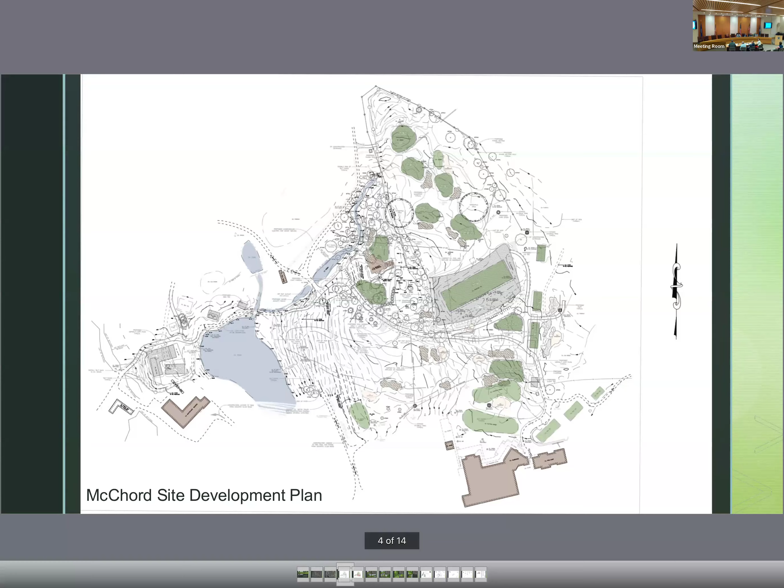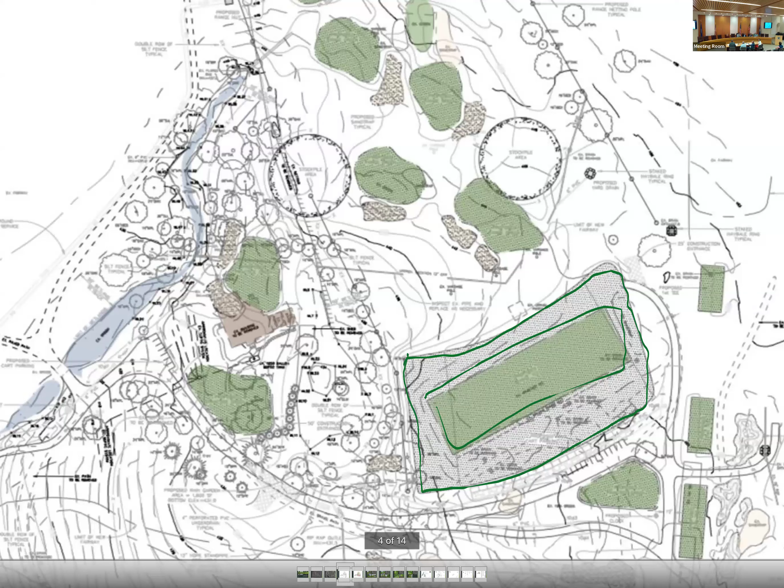This is a partially colored rendering of the site plan that McChord Engineering put together. It shows the proposed improvements and where the existing box is here, that area, the driving range. The driving range tee, that area is being expanded and pulled back towards the clubhouse.

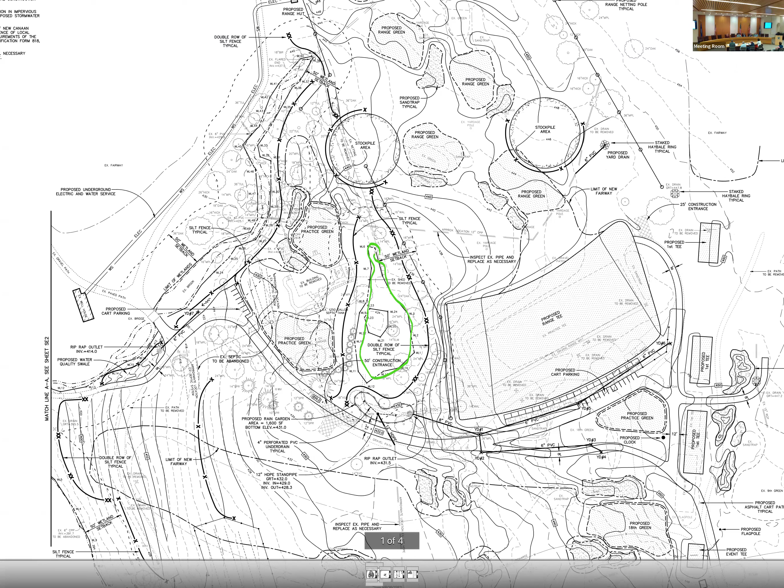There's the exact site development plans that were submitted for the application. That wetland there, and then the stream corridor that comes down here. And we have the 18th, or the driving range that's being expanded. There are also some improvements replacing the existing range netting around the perimeter, which was discussed as part of the proposal to improve safety, so that's going to be replaced and expanded in some areas.

Immediately west of that is the existing residence, including the house, a detached garage, a driveway, walks, sheds, and septic system, all of which is proposed to be removed. Then, for the short play area, we propose two practice greens with some bunkers. Currently, the short play area is south of the driving range, closer to the clubhouse. The proposal is to pull the driving range back so it impacts into that area.

So the proposed improvements call for removing that house and putting the short play area in this location where the house currently is. A number of things are proposed, including collecting some water and putting it into water treatment facilities. There's also a significant reduction in impervious surface, which helps water quality—approximately 7,000 square feet of reduction from removal of the house and some cart paths. That's a great improvement, reducing the potential for pollutant loads.

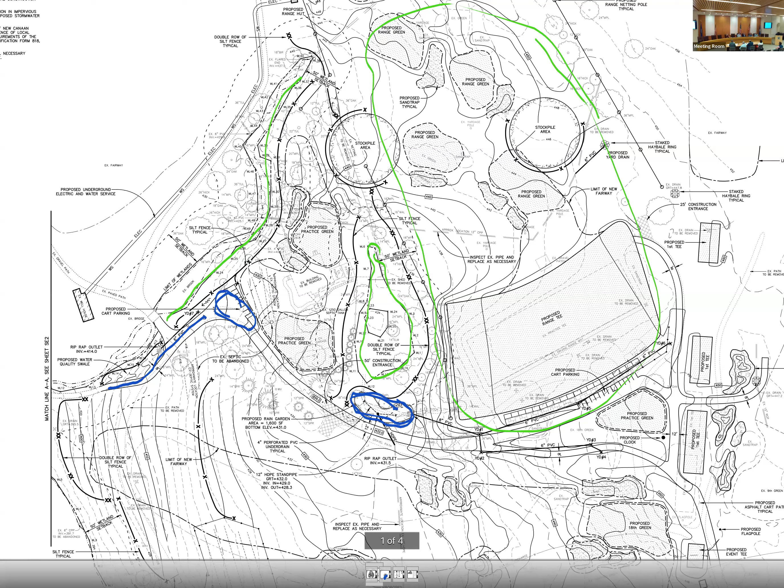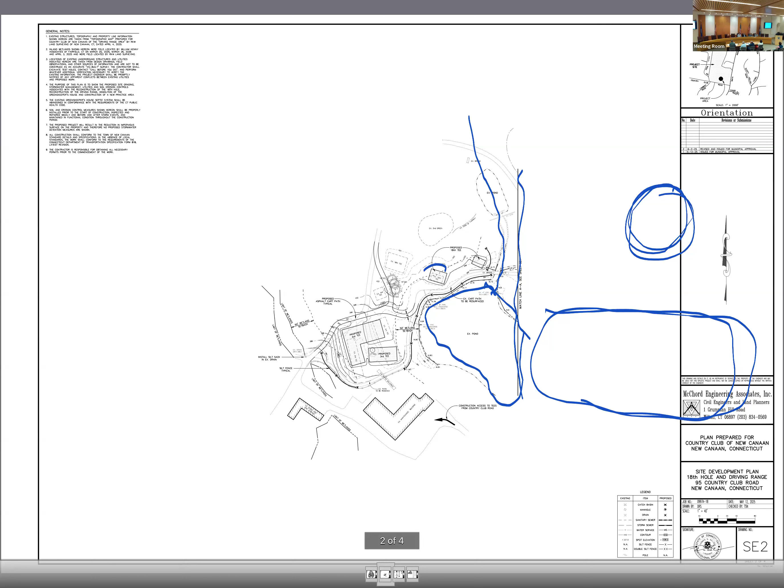This is west of the area I was just showing you—there's a match line on the left-hand side. Here's the irrigation pond, the watercourse that comes up here, and the 18th fairway. The house being removed is over here. There's some reconfiguration of the tee boxes for the 18th hole, all in areas already maintained as lawn. There's also some reconfiguration of the tee box for hole 3, which goes out that way, and an existing cart path here being removed, with some other minor modifications to the cart path through here.

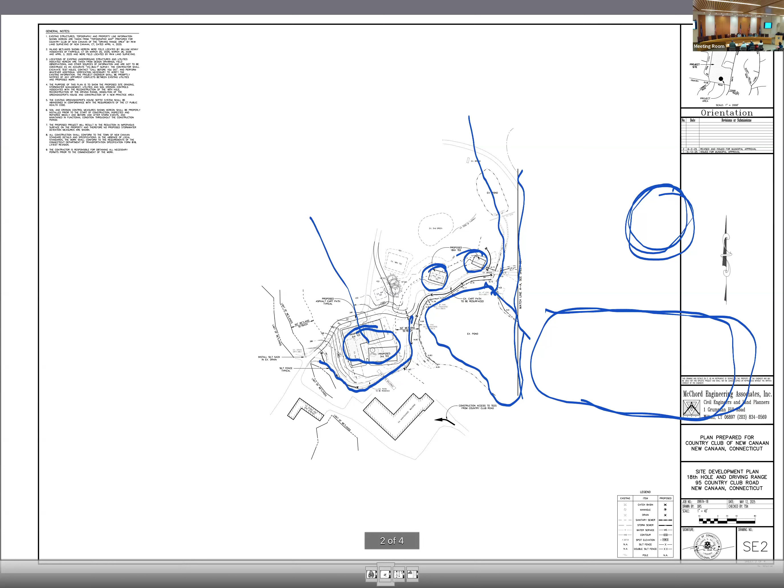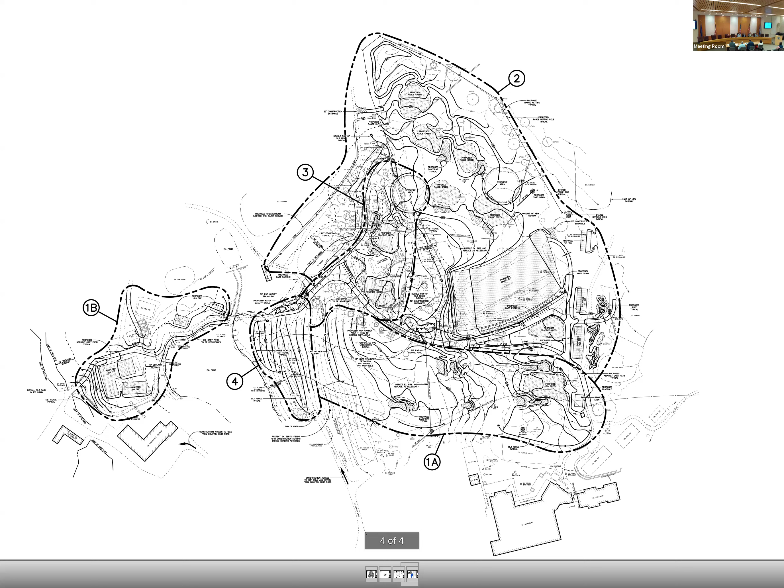The project is proposed to be phased with a start date this September, and there are 4 separate phases identified. The idea is for phases 1 and 2 to be completed this fall, covering hole 18, the majority of it, plus these areas, and then the driving range and hole 18 would be this fall.

I think one thing that's interesting with this golf course work, as opposed to other development properties you see, is that when it comes to stabilization, the use of sod on nearly every surface is of great benefit to the wetlands and water courses, because you get immediate and complete stabilization very quickly and very extensively. So you can significantly reduce the potential for soil erosion.

Phase 1 is about 5 acres of disturbance, and phase 2 is about 6.5 acres of disturbance. They'll be done sequentially, finishing phase 1 and then phase 2. Again, the idea is that would be done this fall before the cold weather for winter sets in.

Phase 3 and 4 - phase 3 being that short play area, and phase 4 just being one small area of hole 18 - would be done in the spring. The practice area is about 1.2 acres, and phase 4 is even a little smaller than that, I think under an acre.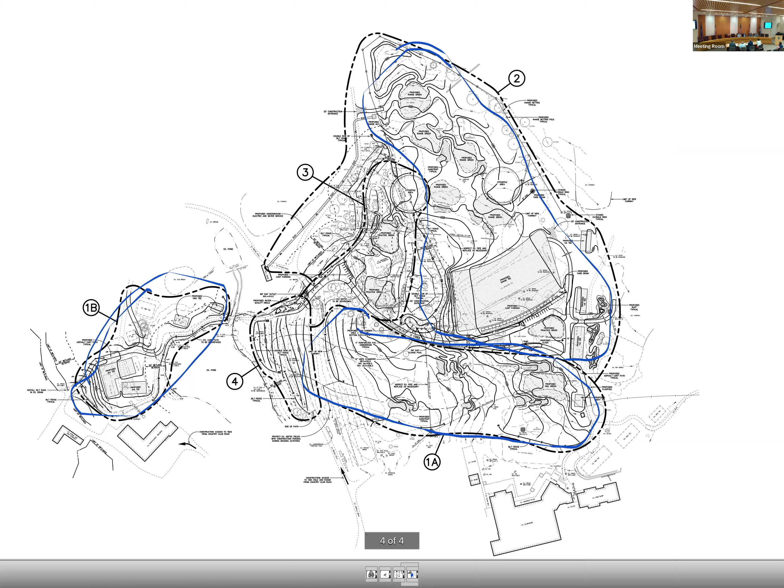This is a drawing that we prepared in my office, where we're showing some work within the wetlands and buffer areas, particularly in the areas adjacent to the short play area and the driving range.

As you might recall, there's a stream that flows from the northeast from the top of the page, west of the existing house, west of the short play area, flowing northeast to southwest, and then again you have this small wetland area here.

There's fencing here, range fencing that extends into the wetland and within the 50-foot setback. So all of those improvements will be removed. The septic system will be removed, and that short play area will be constructed with

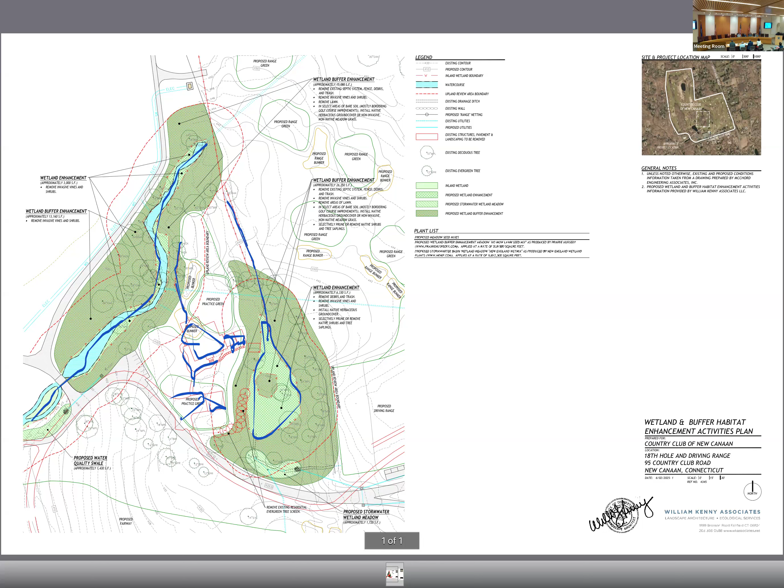the 2 greens, and then some bunkers and fairway adjacent to that so you can play from the fairway area into the green areas. And then within the buffer, in addition to removing some of the structures I mentioned, we're removing some lawn area and establishing a low maintenance meadow habitat.

What's used quite a bit on golf courses is the fescue mix, which requires little to really no amendments. It's very drought tolerant, requires virtually no fertilization, isn't fertilized, is very slow growing, and creates this low no-mow meadow. So it's very low maintenance, no pesticides and fertilizers, and in these buffer areas that type of habitat would be created.

Those are the meadows that you see on the course today in many areas - these fescue mix meadow areas that are just a great filter and buffer, and again don't require fertilization or pesticides and herbicides.

So we're removing existing lawn to put that in, in some areas, and where there's existing woodland we'd keep that. Basically this meadow area would be going in where we are removing current day improvements.

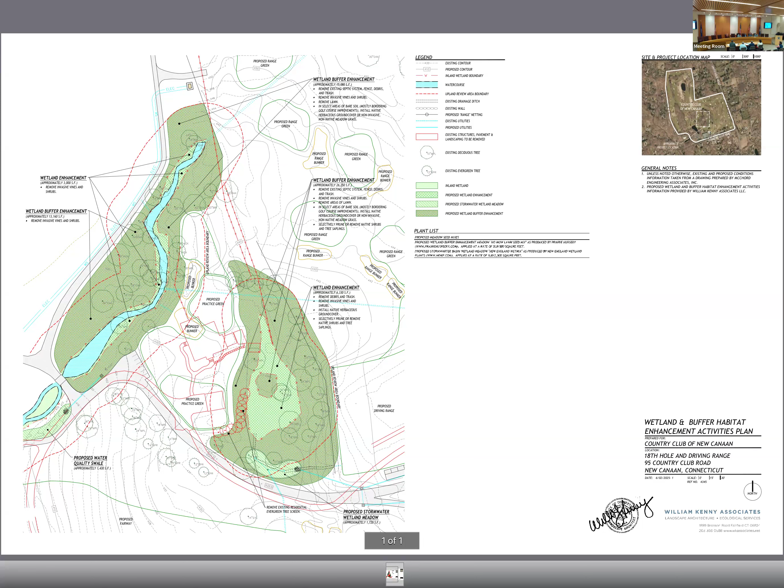Thank you. Sure. Any questions? Comment, Commissioner Redden, for the record.

So I think the site visit was extremely helpful. And having been through all the materials that were submitted, it looks to me like we're improving the wetlands. So not just what the club needs to do, but you're actually improving the wetlands doing it. So I think Kenny Associates has done a really good job. Site visit was extremely helpful.

Angela Jameson for the record. In fact, I was going to ask Mr. Kenny if he could speak to the quality of the wetlands currently and how that will be impacted by the improvements. Sure. I think the nicest wetland area is that stream that's west of the house, but its west bank is the nicest habitat.

That woodland that borders it on the west is quite nice. There's very few invasive vegetation in there, and that bank is mostly, I believe, natural. The bank on the house side, when they built that house, they really moved fill and made a steep area there.

And that's where there's more intrusions. I mean, the yard is closer there and there's a fence that goes out and gets closer. So this work is staying landward of the steep bank, recognizing that steep bank is there. So they're keeping the improvements away from that, and I think on that side, that's a good thing.

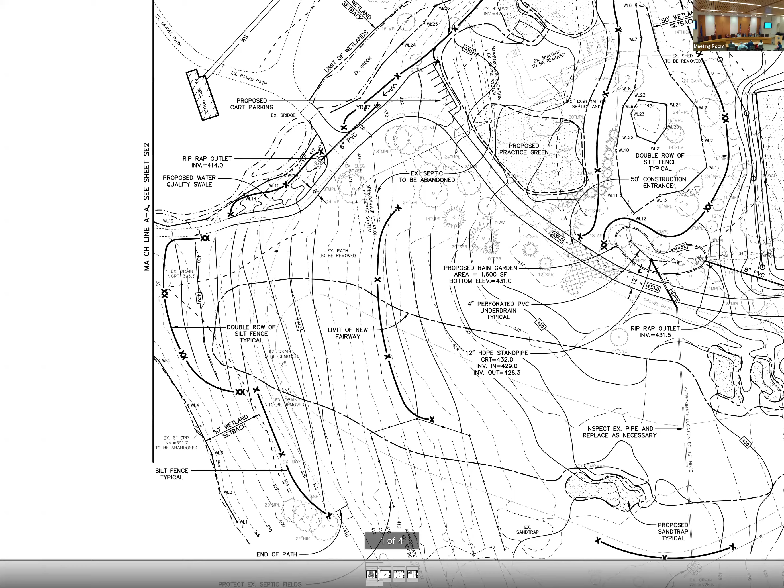East side of the irrigation pond, I think you're going to be having some slope changes there, and I'm wondering what is the final look of that area, and is there any kind of no-mow, low-mow type application? I don't know if it works with your design to get a little bit more of a vegetated buffer to that pond, and I don't know what the grass mix is in that area. If you could just go over that a little bit.

Right, I know there is a fescue meadow area there today that's probably 10 or 15 feet wide. If you could just move up so we could get you. Rowe for the record. In that area where tee shots come into the 18th fairway, it gets a little tricky.

Because people lose a lot of balls and it affects playability, so we try to keep the buffer low to the pond or tight to the pond, to allow for playability and shots in that area. But there's sections where we can increase the area between the pond and the fairway.

Are we on the far side of the pond coming off the tee? Yes, but we remove the road, and the fairway comes down a little bit. Part of the work will be to grade out the fairway a bit more, so it won't all roll back as much. So in theory, I think we probably could.

It just gets tricky where the tees are now, especially for the forward tees. If we increase the fescue too much, it gets more difficult for senior players to hit shots across the pond without going into the tall grass. So it's just, we've got to strike a balance there.

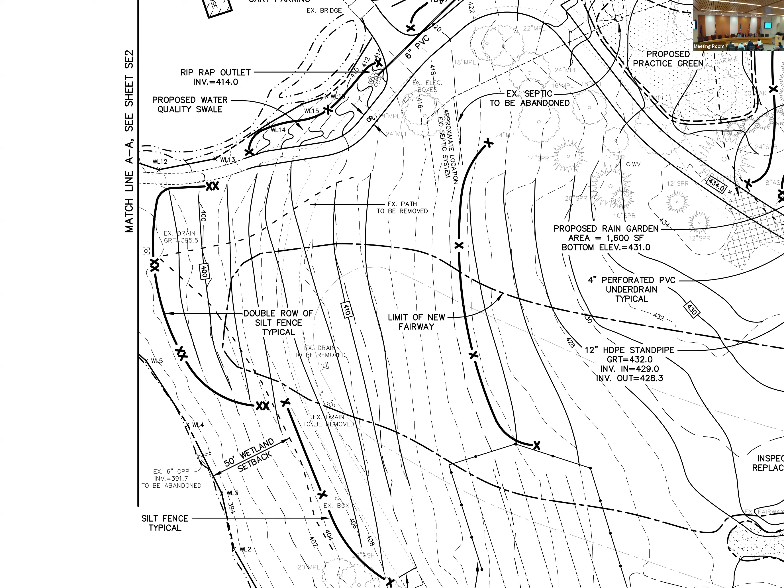Overall, yeah, I only had one special condition, if you would like to hear it, or is there any other questions? Any additional? Oh, please, Mr. Ramirez.

Thank you, Commissioner Ramirez. Just one question on the application. It states that the existing greenskeeper's house will be demolished and the associated septic system and underground utilities will be abandoned. That's different from removal. Or am I missing something there?

So the health department has specific requirements for how to abandon a septic system. I'm not sure, if Tom was here he could answer it. And Kathleen probably knows.

Putting my very old health department hat on, many years ago - so abandonment is a typical term. They will pump and crush the tank or any tanks that are on the project. In this case, with the work they're doing, they're likely to even take out the piping and any trenches that might be present. So it will be completely neutralized before they go into the next phase, or whatever that area is going to be used for.

That's all done through the health department. So they actually have to obtain a permit to abandon the septic system. They will do all that through the health department.

Sanitarian Gino did review the plans, was part of our land use group that reviewed the initial plans coming in. Health department had no further comments because all of the activities being done for the renovations at the club are not interfering with existing septic systems, and they would get the permits they need for abandonment. Thank you.

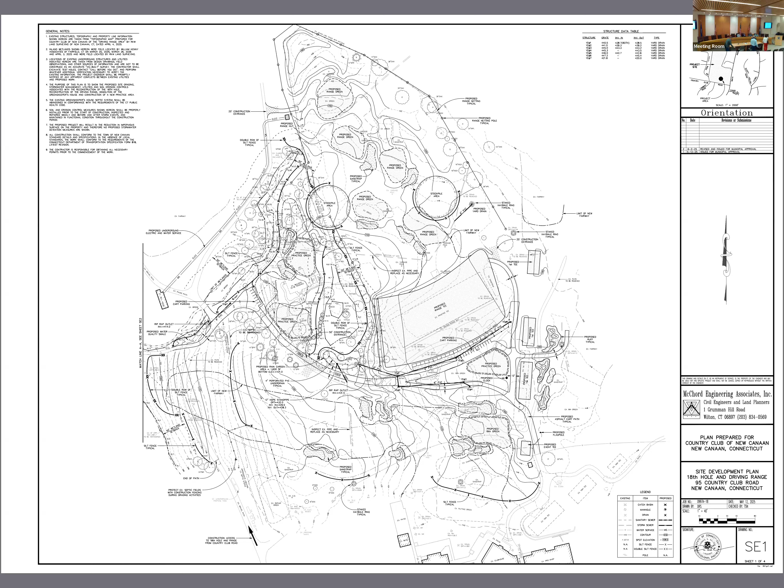Thank you. So we should text Katie. Do you want me to do it? Shall I do it?

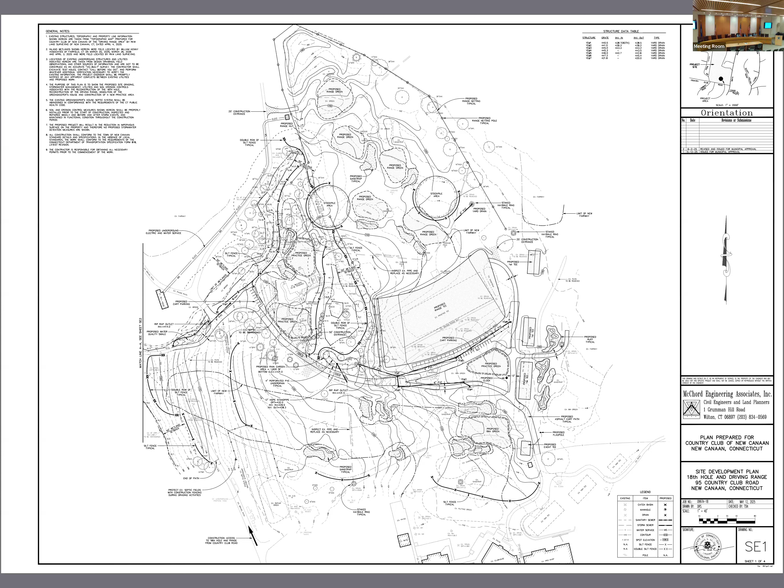Good. So we will resume the meeting of the Inland Wetland Commission, and thank you, Commissioner Owsley, for returning to the meeting via Zoom. So now we turn to the agent's report, administrative actions, and I'd like to begin by asking Director Holland to give us an update on item 13, notice of violation, 93 Buttery Road, Michael Lowry, cease and desist, request to appear to discuss unauthorized activity.

In your packet, I did provide a notice of violation, a cease and desist that was issued to a property on Buttery Road regarding some activities being done at that property that were causing impacts to a neighbor's property. I do want to recognize that Attorney McCann and his client are here in the audience tonight to provide some additional testimony regarding the problems that they're having with this particular neighbor doing an activity that appears to be requiring a permit to do what they're doing.

So the history is in the record, and I did feel it was time to write, after the neighbor had provided some evidence of the activity being done by the neighbor, I was able to then write the notice of violation and send it. This has been a problem that has occurred in the past. I had sent a letter approximately a year ago regarding the same activity of damming up the watercourse and causing impact to the neighbor's property. And again, it seems to be happening again in 2025. So I do not know why this has continued to be done by the downstream neighbor. And I thought it was best to require the person to come this evening and explain what the activity is that they're doing, so that the commission can opine on what to do further with it.